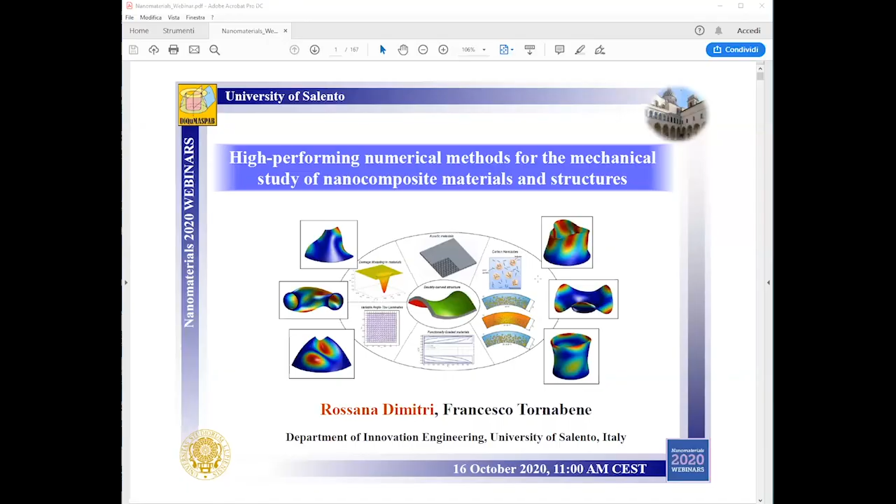So after a brief introduction, I will show you the main basics for anisotropic laminated and lattice shells. Then I propose the so-called generalized differential quadrature and generalized integral quadrature methods as efficient numerical tools to solve different structural problems, applying different materials and constitutive relations within a large numerical investigation.

So here I briefly describe the three basic aspects of the problem. The first two are theoretical, based on a unified formulation and differential geometry for a general description of higher order physical shell theories. The last one has a computational nature and relies on two numerical techniques applied to approximate the derivatives and integrals of equations involved in each selected problem to check for accurate solutions. These are the GDQ and the GIQ, respectively.

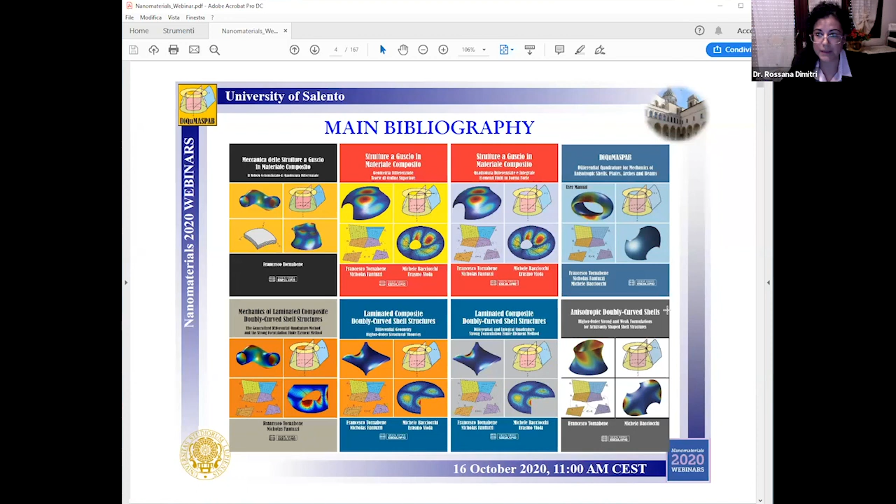More theoretical and computational details about the materials and structures presented here can be found in these books, where you could recompute all the results with free software. Here you can see the name of the software that we have written over the years.

So let's start with the theory of anisotropic laminated shells, whose general shape is defined by means of a reference surface, curvilinear coordinates, and the position vector for an arbitrary point of the solid throughout the thickness, which is in turn defined by means of the position vector of the corresponding point on the reference surface.

In a differential geometry context, this corresponds to introducing the metric of the parametric curves and surfaces by means of the first fundamental form and the Lamé parameters. Then we define the curvatures with the second fundamental form and the normal vector definition at each arbitrary point of the shell element.

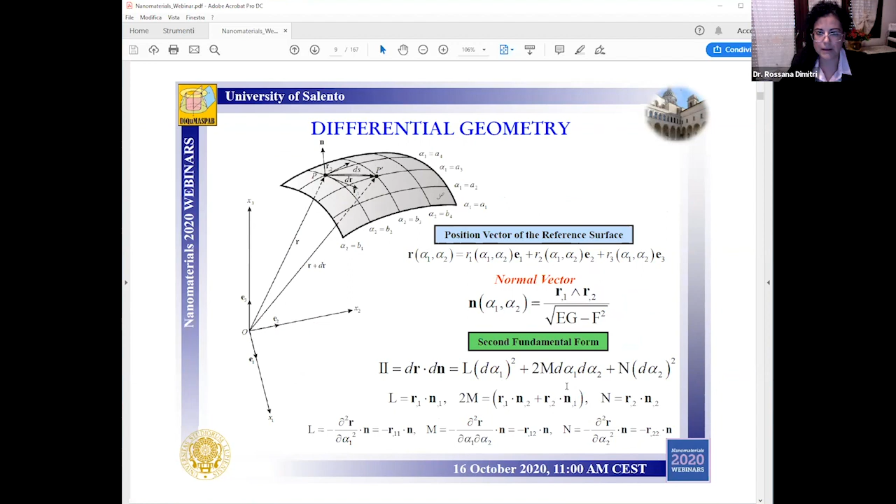So in a principal system of coordinates, this means that the quantities f and m will be equal to 0, where the principal radii of curvature are defined through these ratios you can see here below, R1 and R2.

So briefly, I introduced the kinematic model within a unified formulation that allows us to study and compare several higher order displacement fields in a unified manner, such that the mechanical behavior of doubly curved structures is defined by proper selection and choice of several thickness functions that characterize the kinematic expansion along the three principal coordinates.

In this context, we define a moderately thick shell according to an equivalent single layer approach, including the zigzag effect or Murakami function, as you can see here in the extended form.

Here you see an example of higher order shear deformation theory depending on 18 degrees of freedom, where the well-known Reissner-Mindlin theory, the first order shear deformation theory, represents just a subcase defined by means of two thickness functions and 5 degrees of freedom. So look at the reduced kinematic relation here below.

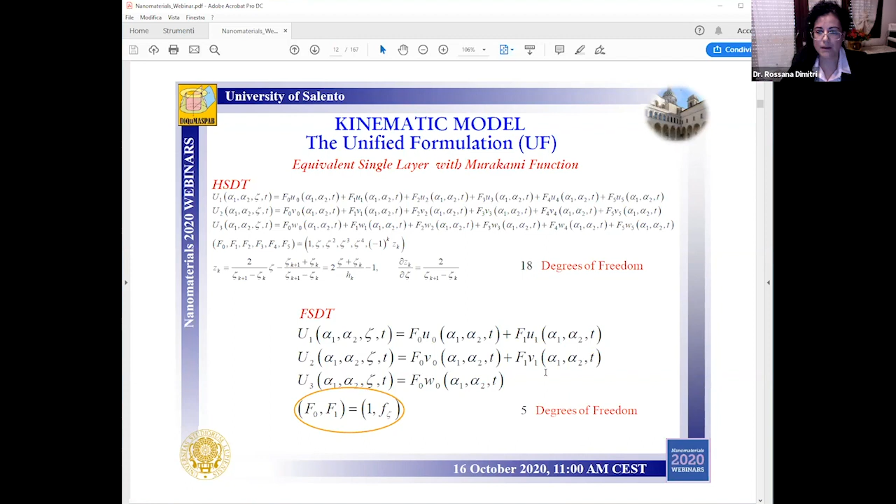And due to the general assumptions of this approach, each thickness function can take a different expression, as you see here. According to this choice, several kinematic models can be obtained and studied.

Now, for simplification purposes, we can generally define the kinematic model for an equivalent single layer approach in this kind of compact form, where we account for the zigzag function and Murakami function. And let's look at the following different unified formulation examples.

As a first example, if a fourth order kinematic expansion is considered, we obtain this following higher order kinematic model where we use power series as thickness functions, or assuming different thickness functions such as hyperbolic sine and cosine, which yields the following kinematic models here below.

Based on the compact notation, several structural theories characterized by a different order of kinematic expansion tau can be obtained for thickness functions independent of the principal direction for each generalized displacement component. Here you can see this kind of list.

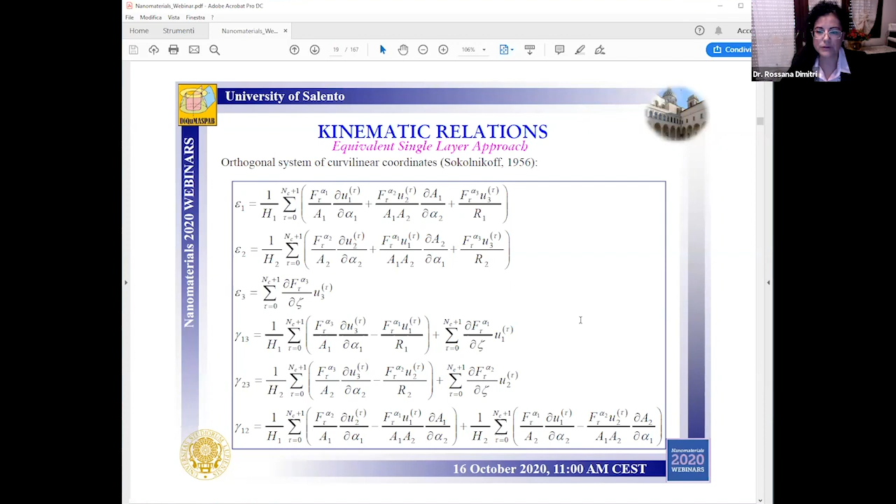Starting with the kinematic assumptions, we can define the kinematic equations for doubly curved shell structures, which relate the strain components and the kinematic field by means of a kinematic differential operator that can be redefined, as you can see here, within an equivalent single layer approach, where the following definitions are set for the in-plane strain components, the transverse shear strain, and the normal strain components.

An important aspect now is related to the design material, its mechanical properties, the constitutive law, and under a linear elastic material assumption, for example, see the constitutive law introduced for an anisotropic material with the well-known 21 elastic constants, or the orthotropic material with the 9 constants, or once again, the laminated composites with a fixed number of laminae within the laminate.

And among the class of particulate composites, we can also model the so-called functionally graded materials to account for the continuous gradual variation of the mechanical properties of materials from the bottom to the top side of each lamina, in order to reduce possible stress concentrations and residual stresses or thermal stresses within the laminates.

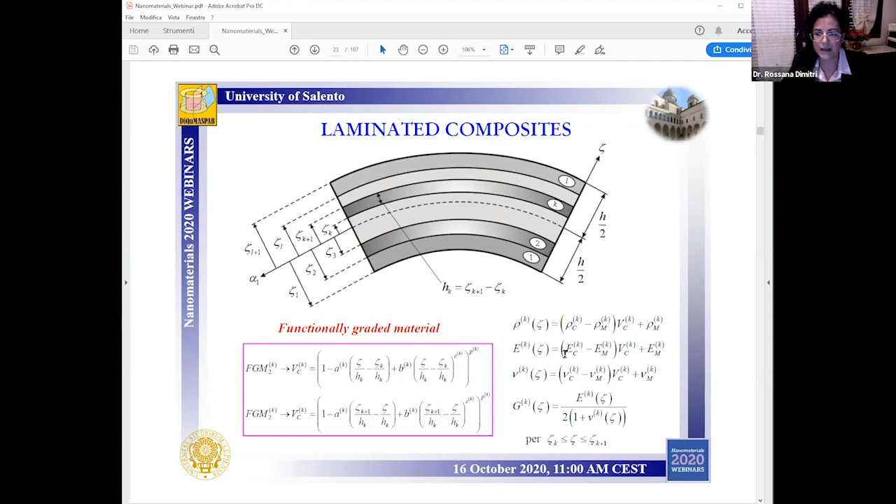This means that the mechanical properties of a functionally graded material refer to those of each constituent, for example ceramic and metal, together with a volume fraction defined according to some fixed continuous laws, as you can see here. And for each lamina made of anisotropic material, the constitutive law in the geometric reference system can be defined.

As you can see in this slide, we determine the transformed elastic coefficients first, and then we can define the generalized internal actions reported on the shell reference surface in terms of the generalized strains by means of the constitutive operator. You can see here this block matrix, whose elastic coefficients are evaluated numerically for each point of the reference surface of the shell.

I want now to highlight an important aspect of this approach: the mechanical properties of each lamina can vary along the three principal directions. So we have this kind of coefficients, and we can consider that the thickness of each lamina can vary along the two principal directions - the fact that the thickness of the shell can be variable.

But to consider this kind of variation in the model, we have to evaluate the derivatives of the engineering elastic constants in a numerical sense. So I need a numerical technique to do this kind of mathematical operation.

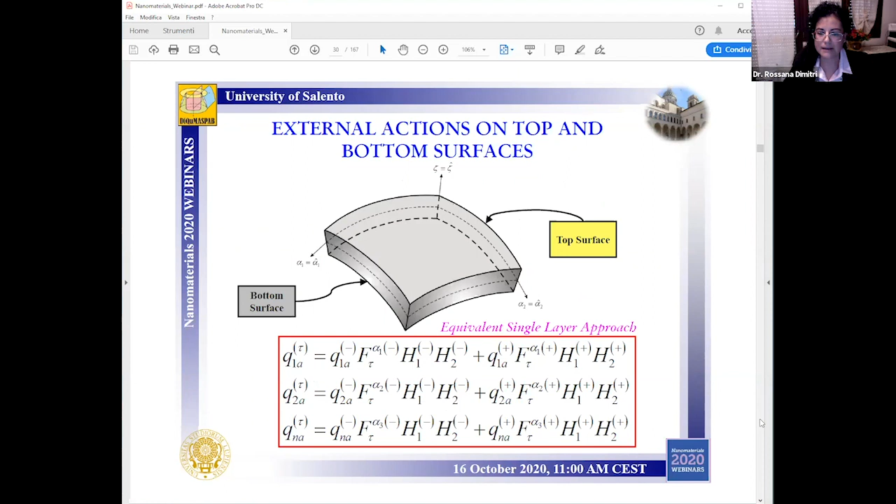So then we apply the Hamilton principle to obtain the equations of motion together with the boundary conditions. We have defined external actions that act on the top and the bottom side of the structure. After a mathematical manipulation, we get this set of governing equations depending on the inertial quantities together with the boundary conditions of the shell edges, with a constant alpha 1 and alpha 2 respectively.

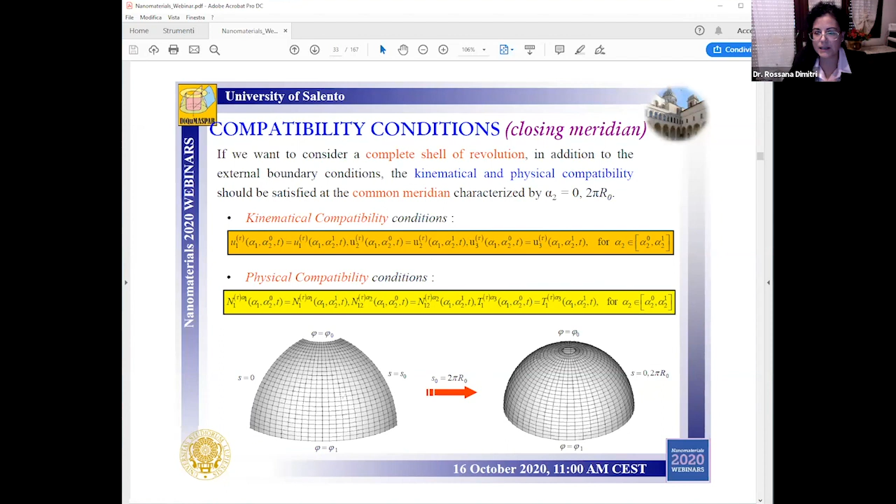At the same time, if we want to treat a complete shell of revolution as a structural member, we have to satisfy the kinematical and physical compatibility condition at the common meridian, characterized by fixed values of alpha 2, as you can see in this slide, since the shell of revolution represents a special case of a panel of revolution, maintaining the problem completely bidimensional, two-dimensional.

Look at these two further examples of shells of revolution, just to show you that similar compatibility conditions can be enforced along the so-called closing parallel or closing meridian. Then we can write the fundamental nucleus in terms of the displacement field defined along the reference surface, and then we can assemble the complete system of equations, as you can see here.

Now let's introduce the numerical technique applied here to solve this kind of differential system of equations, the so-called generalized differential quadrature method, that allows us to approximate the n-th derivative of a function as a weighted linear sum of the functional values at some fixed collocation points by means of these weighting coefficients.

In this context, if we select as basis functions the Lagrange polynomials, the Lagrange trigonometric polynomials, or the sinc functions, we have an important mathematical property: the coefficient matrix A becomes an identity matrix, and the arbitrary derivative will depend on weighting coefficients Dij exactly equal to Aij. After that, if we want to shift from the definition interval to the physical domain, we have to apply a linear transformation of the weighting coefficients between the two different intervals, as you can see here.

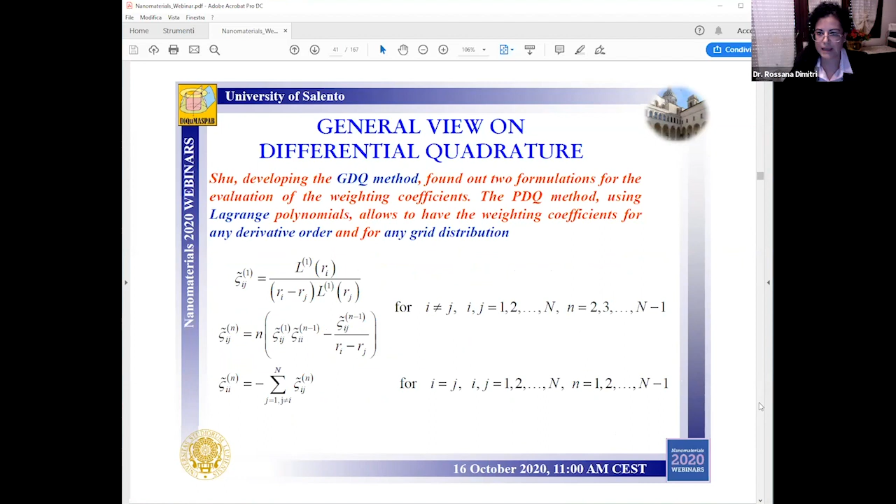At the same time, if we want to evaluate integrals of a function, there is another useful numerical tool that can be applied: the generalized integral quadrature method, as we will apply in the following.

In line with the previous method, the integral of a function in a closed domain can be approximated by a linear combination of the functional values by means of the GIQ weighting coefficients. These coefficients are evaluated by an inversion of the matrix W, which depends on the matrix of the weighted coefficients of the first order derivative computed here.

Using this simple relation, we can evaluate the integral of a function in any kind of closed interval. Now, to study a complicated shell geometry, we can start from an unmapped geometry.

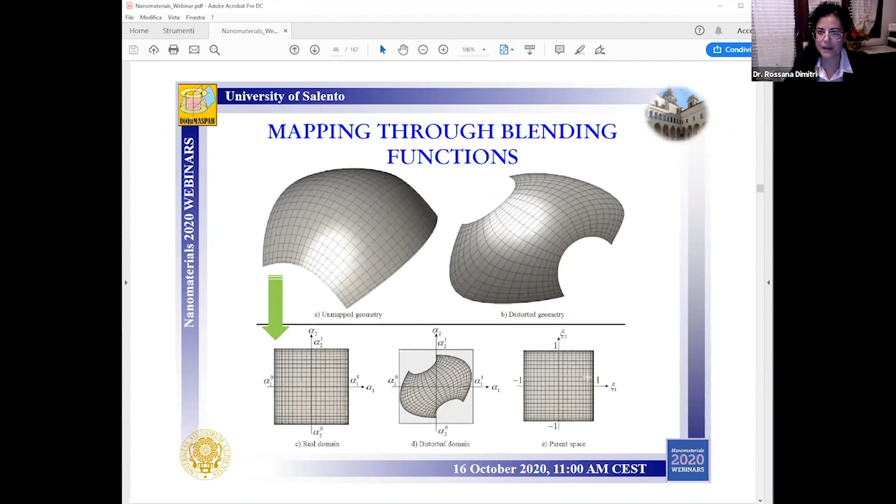We introduce a mapping technique to pass through the parent space in order to obtain the distorted geometry. Here is the coordinate transformation, where alpha1, alpha2 refer to the physical orthogonal coordinates, and xi, eta are the point coordinates in the computational domain.

This requires the use of some blending functions, where we use the computer-aided design basis function as defined below, by means of the parametric lines of the curvilinear boundaries and the computed corner points of coordinates.

We have to define the Jacobian of the transformation so we can compute the first order derivatives, and applying the first order derivative definitions twice, it's possible to obtain the second order derivatives.

To describe the curvilinear edges of the patch, we use a design tool: the non-uniform rational B-splines as mapping functions, where a rational curve can be obtained by a projective transformation of the B-spline curves in the projective space.

These functions have some important mathematical properties, as you can see in this list, that provide a robust description of the problem, so we can study any kind of complicated geometry, as you can see here. But I must introduce another important aspect.

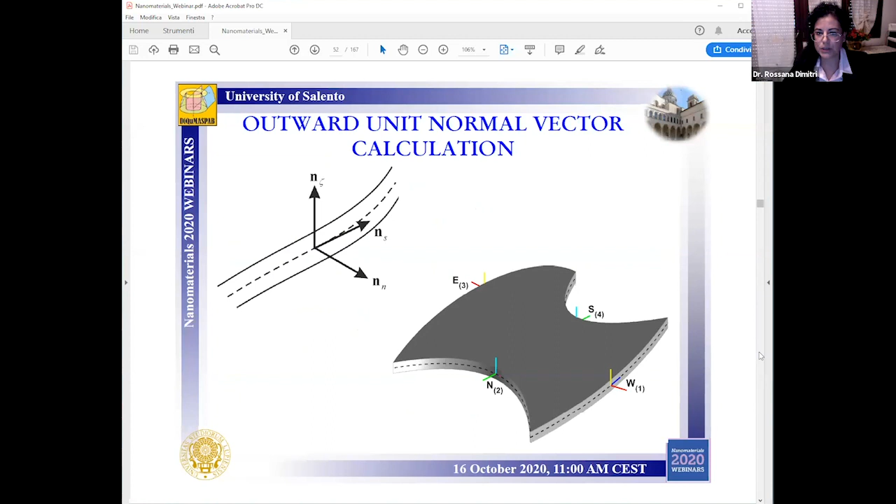I mean the boundary conditions of the curvilinear edges that you can see here in the slide, both in a kinematic and in a static sense.

So far we have discussed a strong-based formulation of the problem, but another numerical possibility can be represented by the classical finite element formulation.

For an nth order finite element based on the Lagrangian polynomials, the displacement field can be approximated as you can see here, or in the following compact matrix form.

Thus the problem can be written in its variational form. Once again, by applying the Hamilton principle, the stiffness matrix takes this form.

This can be rewritten in a discretized form using the numerical integration discussed before. The differential operators defined by means of the Lamé parameters and their derivatives are numerically discretized using the GDQ method.

And also for the mass matrix and the external force vector, we can rewrite them in a discretized form, as you can see here.

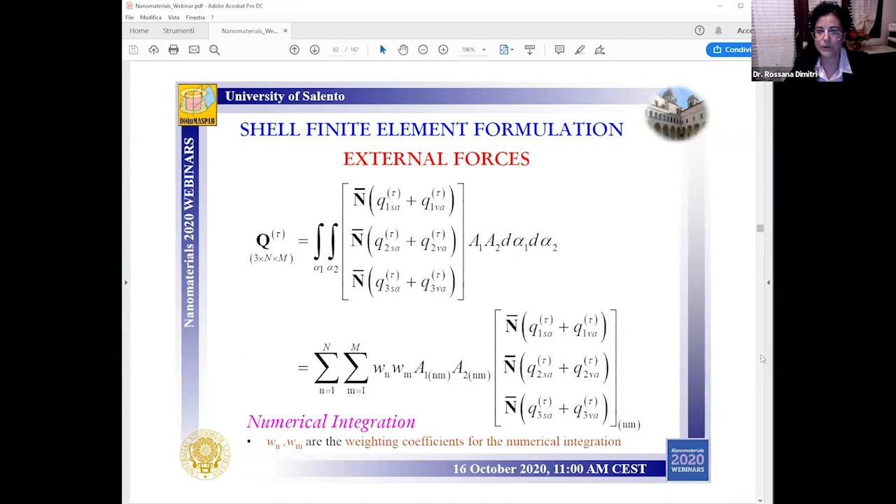Now, if we want to treat the dynamic problem of these structural components, we have to solve a classical eigenvalue problem in discrete form, whereas for a static analysis, we have to solve a classical linear problem.

So now let's discuss applications and results, where we first apply the finite element method based on a strong formulation isogeometric analysis to treat shell structure components with different shapes.

As a first example, we analyze the free vibration of an isotropic panel for different boundary conditions, lamination schemes, higher order formulations and theories, where we can cut the undistorted domain using a rhomboidal shape.

We show first the accuracy of the numerical method and proposed formulation by comparing the first 10 frequencies for a lamination scheme of 30-45 degrees, as provided by the first order shear deformation theory and higher order theories, against the 3D FEM based approach from commercial codes.

So we have used Abaqus in this case, with very good agreement between results, and here are the related mode shapes for the selected boundary condition.

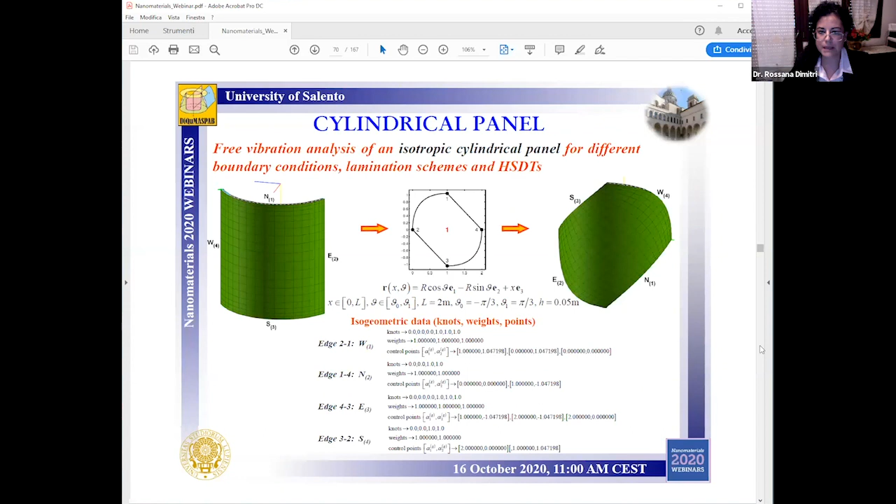As a further application, let's consider a cylindrical panel cut by this general shape, defined by two curvilinear edges and two linear ones, to yield the complicated geometry you can see on the right side of the slide, made of one isotropic layer, an aluminum, for two different boundary conditions, where we compare the 3D FEM-based solutions with the 2D ones as provided by 2D higher order formulations.

So the very good matching between results confirms the high accuracy of the proposed numerical approach, despite the reduced computational cost against the classical 3D FEM-based formulation.

As expected, a completely clamped geometry features higher frequency because of the different structure stiffness with respect to other boundary conditions. A free clamped boundary condition, where the lowest frequencies are obtained in any case for the same structure with free edges, as you can see here at the bottom side of the slide, because of the increased structure flexibility.

Here are the first 6 mode shapes reflecting the selected boundary condition.

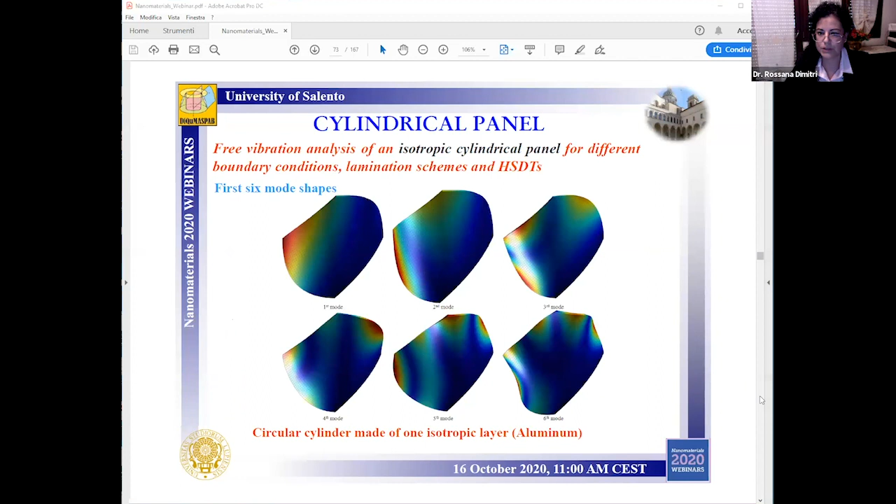For a comparative evaluation between the strong and the weak formulation isogeometric analysis, let's consider a laminated doubly curved shell for different boundary conditions, stacking sequences, and higher order formulations, where I cut this undistorted domain using this complicated curvilinear geometry to give the final distorted structures you can see here on the right side of the slide.

Here are the results for a completely clamped doubly curved shell structure, where each layer is made of a graphite epoxy material with a stacking sequence of 0, plus/minus 45. Both the strong and the weak formulation get very accurate results compared to the classical 3D FEM elasticity solution.

This proves once again the accuracy of our predictions, which are also plotted in terms of mode shape in line with the selected boundary condition.

Now another application involves doubly curved laminated lattice shell structures, as largely used in design and manufacturing, especially in aerospace structures, with different shapes and geometries depending on their operational requirements.

The mechanical properties of lattice structures are related to their fabrication technologies. In discrete models, the ribs of the lattice shells are modeled through beam finite elements. Instead, here we apply a GDQ-based continuous model based on a homogenization technique to define the equivalent mechanical parameters.

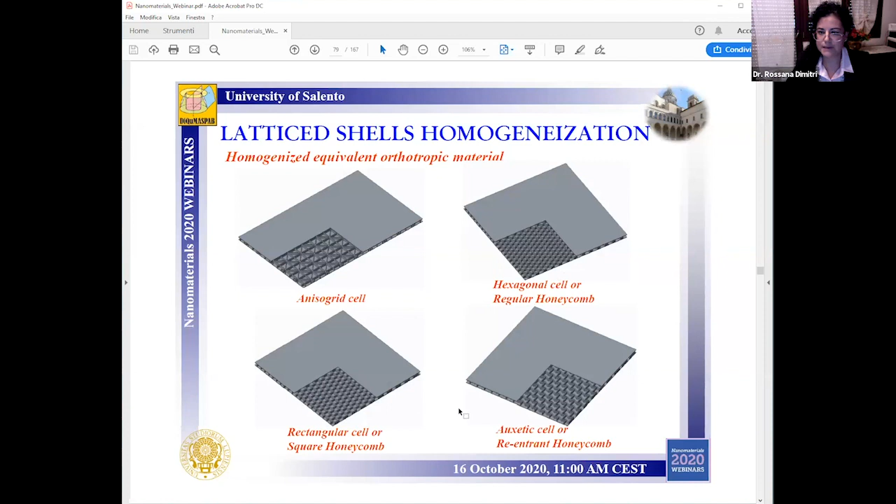See here some examples of lattice structures with an anisogrid cell, a hexagonal cell, a rectangular cell, or an auxetic cell. So for a lattice layer, a first approximation could consider

the equivalent orthotropic material, whose equivalent constants for a unit cell could be computed as a function of the main geometrical and mechanical properties of the ribs.

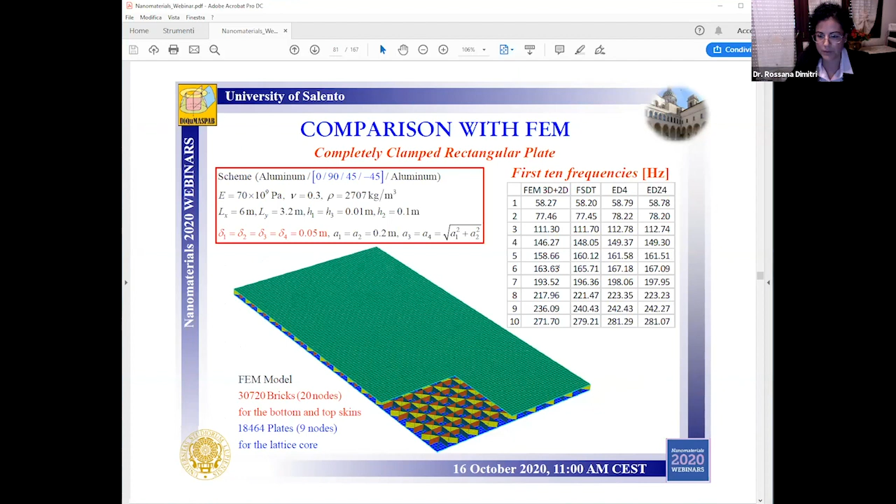The accuracy of a GDQ-based continuous model is first checked for a completely clamped rectangular plate with a lattice core, by comparing our results in terms of vibration frequencies with respect to a classical FEM approach. The very good agreement between our results and those based on the FEM approach confirms the good performance and accuracy of the proposed numerical method, also for this kind of application.

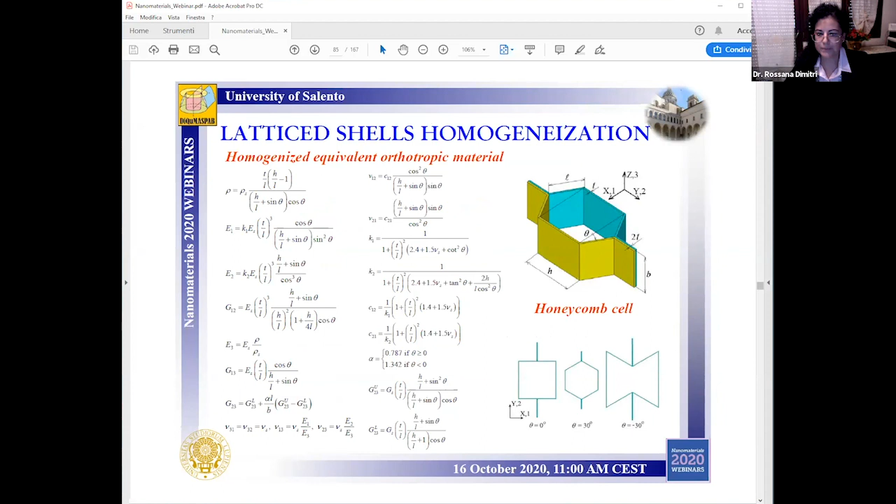In what follows, I show you some structural applications of a novel class of bio-inspired smart composite materials, in which the fiber orientation can vary with continuity within the domain.

In this context we will describe this kind of material, the variable angle tow reinforcement, that can be obtained by placing the reinforcing fibers along some curvilinear paths.

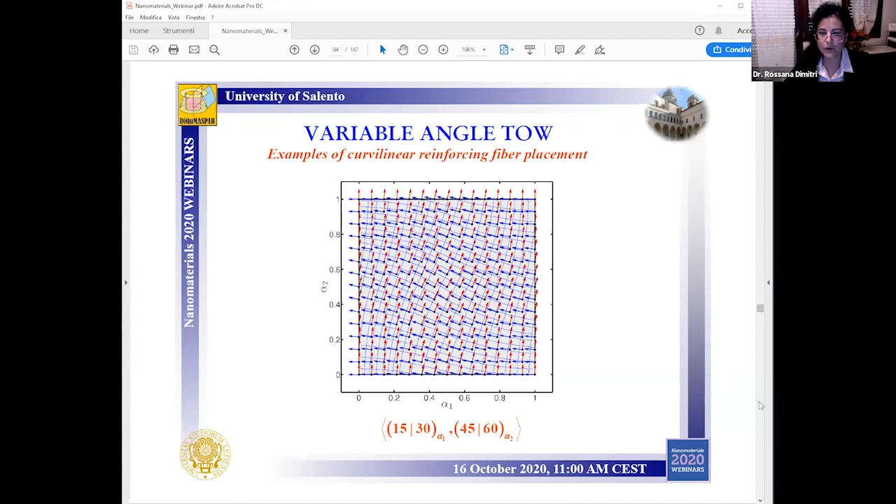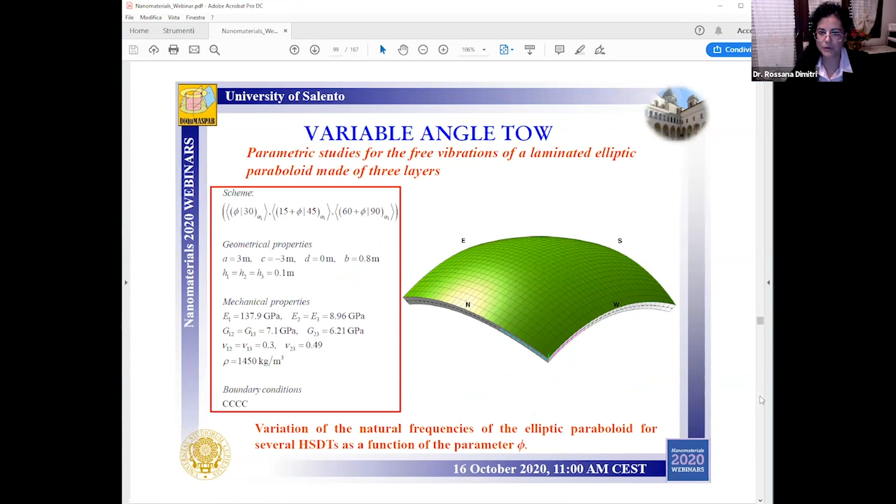Let's consider a laminated elliptic paraboloid made of 3 layers, where we check the sensitivity of the vibration response, changing the parameter phi, which defines the varying alignment of the fibers, and look at the variation for the first 10 natural frequencies under the selected theory as we vary phi.

This reveals the great dependence of the mechanical performance and structural stiffness just by varying and tuning properly the reinforcing phase and its alignment within the material. Look also at the kinematic response, which is perfectly coherent with the selected boundary condition, a completely clamped structure.

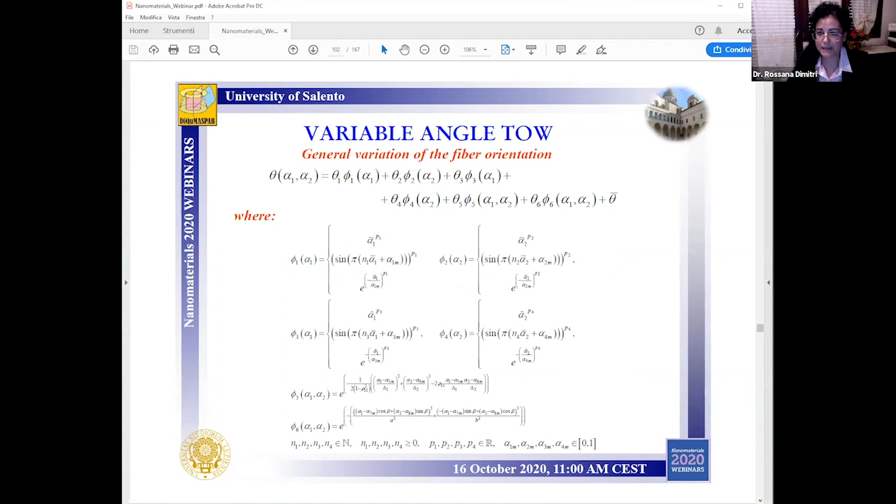An alternative and more general expression can also be introduced to represent the variation of the fiber orientation. Mathematically, this relation can be written by means of 6 different functions, as reported here below: the power function, sinusoidal function, exponential function, Gaussian function, elliptic function, and so on.

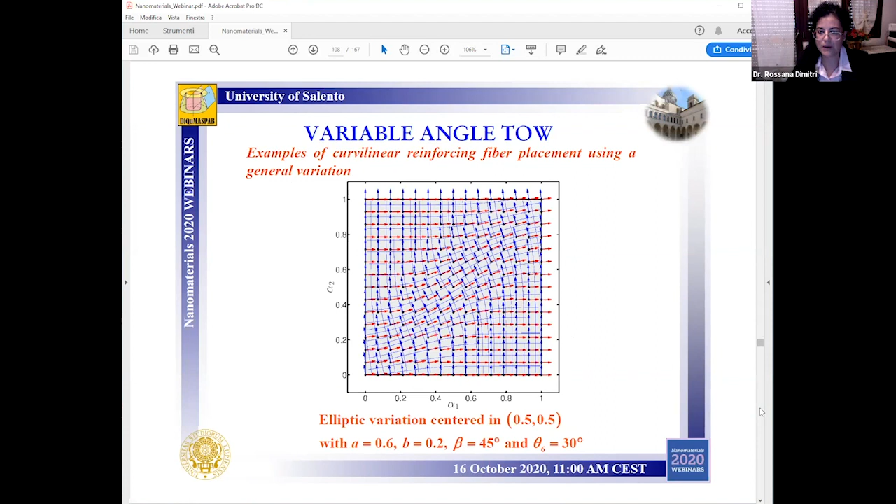Here we represent some examples related to the application of this mathematical relation on a square domain. Here are other examples, and have a look here now at some further examples of this application.

And as a further application, let's consider a clamped-free doubly curved sandwich panel of revolution with a foam core and two face sheets with different angle tow paths.

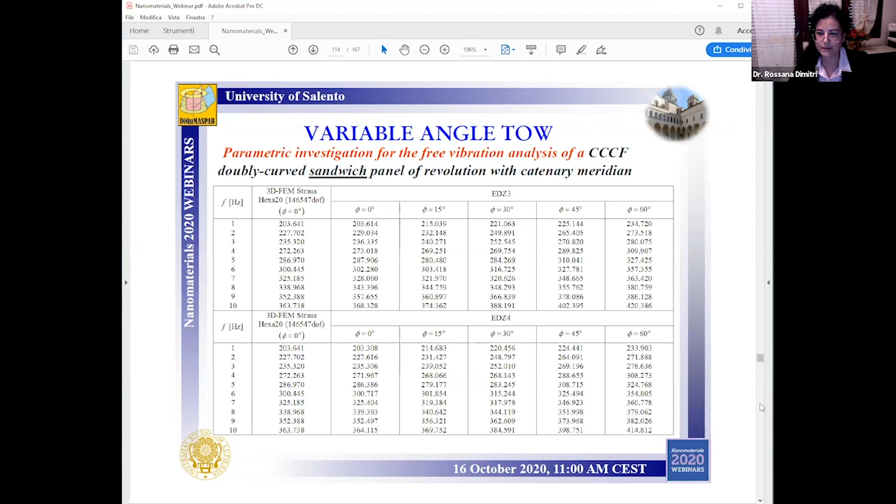Here we compare results from a 3D FEM and different 2D higher order theories for different values of phi. Under the assumption phi equal to 0, the first column here, we revert to classical laminated composite structures, where you can notice the very good agreement between results, and also that predictions from different higher order theories are quite close to each other for each fixed value of phi.

And let's move to another kind of reinforcing material, I mean functionally graded materials and carbon nanotubes, in a context where nanostructures are attracting the interest of many scientists.

The proposed formulation allows us to consider the agglomeration of nanostructure embedded in a polymeric matrix, and different distributions along the shell thickness, where the volume fraction of the reinforcing carbon nanotube phase is defined by this quantity VR, the carbon nanotube volume fraction value that depends on the carbon nanotube mass fraction and the density of both the matrix and the reinforcing phase.

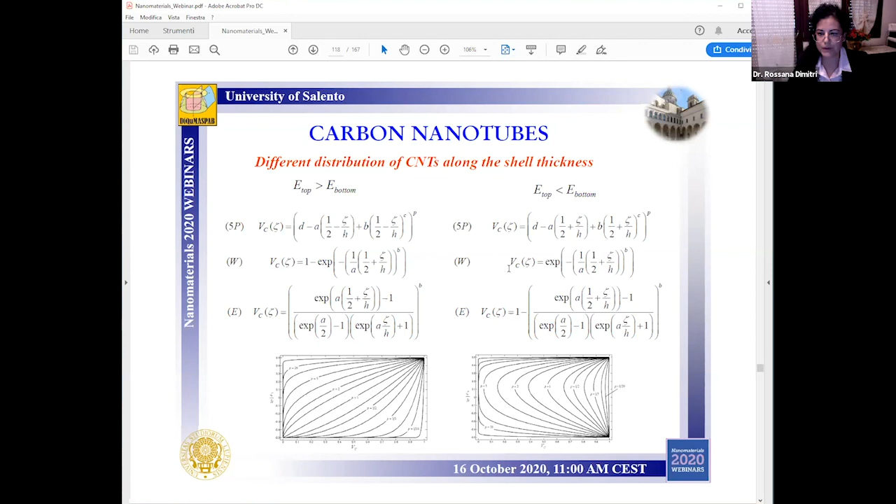VC instead is defined by different distribution laws throughout the thickness, as reported here in this slide. So the overall mechanical properties of the layer reinforced by carbon nanotubes are evaluated using the Mori-Tanaka scheme.

A two-parameter agglomeration model is defined by means of these two quantities, eta and mu, where the first parameter is the volume fraction of the inclusion, the ratio between the volume of the spherical inclusion and the total volume of the lamina.

And the second one, eta, is the ratio between carbon nanotubes in the inclusion and the overall carbon nanotubes. Depending on the different relation between these two parameters, we can obtain different agglomerations of carbon nanotubes within the material. The overall mechanical properties of the composite can be determined in a homogenized form according to the Mori-Tanaka scheme.

See, for example, the effective bulk modulus and shear modulus for the composite layer, defined by means of the properties of the inclusions and hybrid matrix.

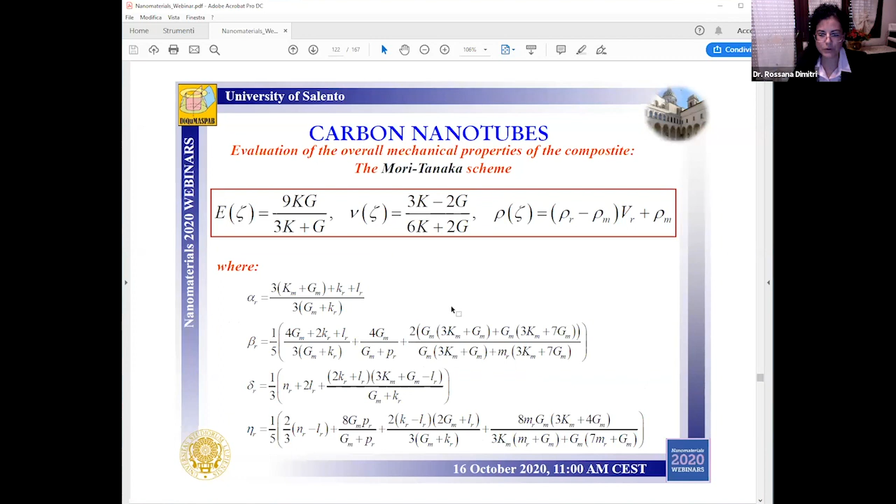And since the composite ply is isotropic, the Young's modulus, the Poisson ratio, and the density are evaluated as you can see here, where we introduce also these further quantities.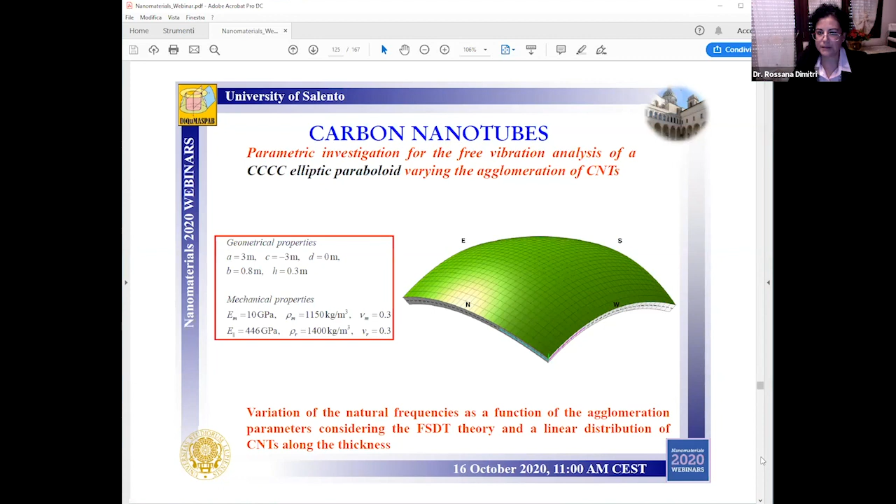Now, as a numerical application, let's discuss the free vibration response of a completely clamped shell for different agglomeration parameters of carbon nanotubes. In this example, we assume a linear distribution of carbon nanotubes along the thickness, applying a first order shear deformation theory under a fixed geometry and fixed mechanical properties of the matrix and of the reinforcing phase.

Now, as a further parametric analysis, we account for the case of no agglomeration of carbon nanotubes within the matrix. This corresponds to the case where we assume eta equal to 1, and also mu equal to 1, as you can see here, for different values of P.

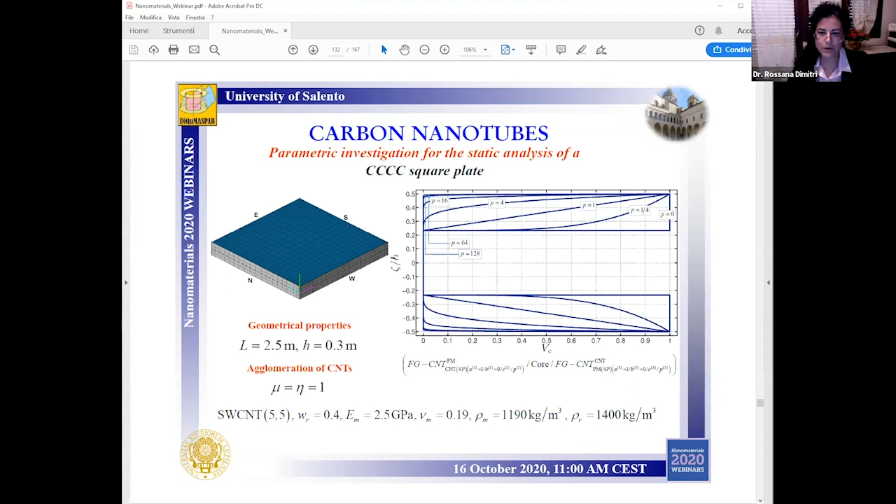The two limit cases are also obtained using the 3D FEM model in Straus7, while the intermediate values of P give a smooth variation in between.

As a last example, we analyze a clamped-free, clamped doubly curved panel of revolution with a tractrix meridian, made of 3 layers, subjected to a normal pressure on the bottom side and a shear load on the top side. Both the external laminae and the core are reinforced by carbon nanotubes under agglomeration with mu fixed equal to 0.5 and eta equal to 0.75, and a fixed mass fraction for the reinforcing phase equal to 0.4.

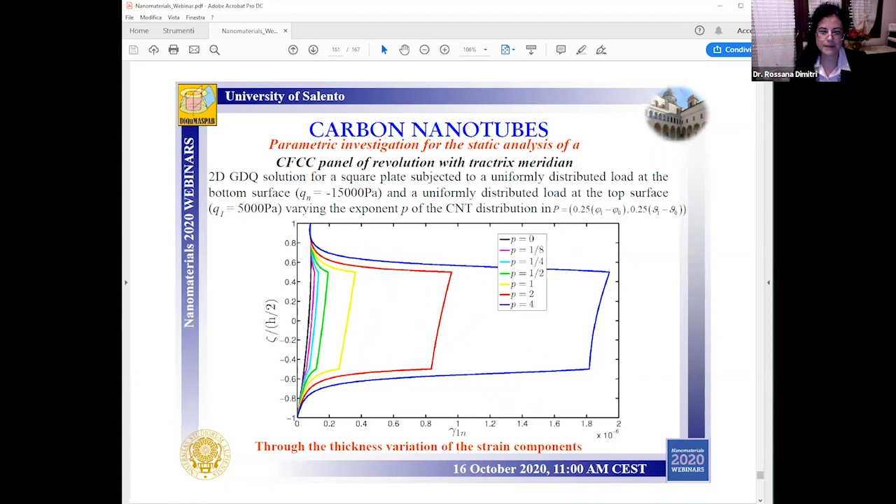So this kind of tailorable response could be of great interest for optimized design purposes of programmable materials, of course just depending on the selected application and the mechanical requirements.

Just concluding, the proposed approach for the analysis of two-dimensional structures by means of the GDQ and the generalized integral quadrature method has allowed us to analyze anisotropic composite and lattice shells and panels of different shapes, and has allowed us to study the behavior of generally laminated composite shells and panels characterized by different lamination schemes. It has shown the influence on the dynamic and static structural behaviors of the choice of a power law distribution for laminates made of functionally graded materials and carbon nanotube materials, and has provided results very close to a classical finite element method approach using different software and commercial programs. It has also produced accurate and reliable results independently of the selected boundary condition and grid distribution.

So at the end, I would like to thank you for your attention, and if you have any questions, I'm here to reply. Thank you very much.

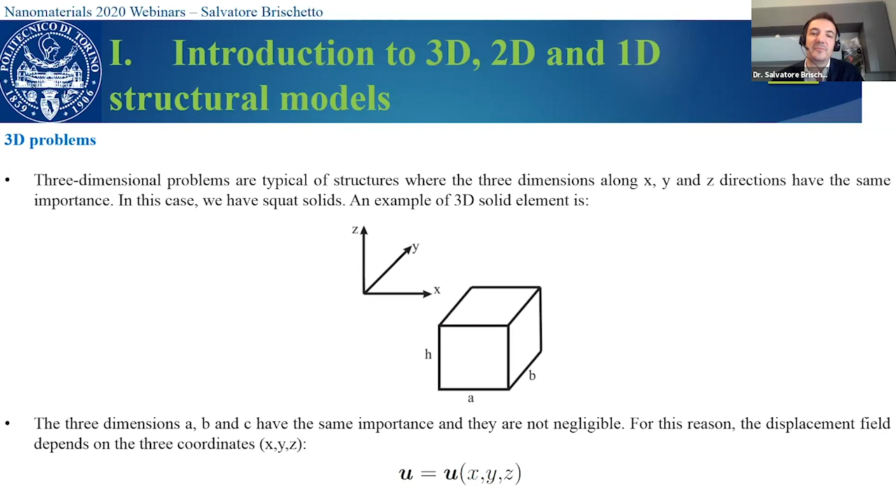In detail, in the case of three-dimensional problems, we have typical structures called squat solids, because in this case the three dimensions A, B, and C have the same importance, and no dimension is negligible. So I work with a displacement component, a variable which is a function of all three coordinates.

In the case of two-dimensional problems, we have typical bidimensional structures, for example plates and shells. In this case, one dimension, in particular through the z direction, which means the thickness dimension, is negligible with respect to the other two dimensions in the plane. This is a typical bidimensional structure: a plate, where we have no curvature in the in-plane directions, and in this case we can transfer the thickness coordinate into opportune thickness functions.

In the case of curvature, we have shell structures. Some examples are cylindrical panels or spherical panels, when we have only one curvature in the alpha direction, or two curvatures in the alpha and beta directions. So we can write this formulation in either rectilinear orthogonal coordinates or in orthogonal curvilinear mixed coordinates.

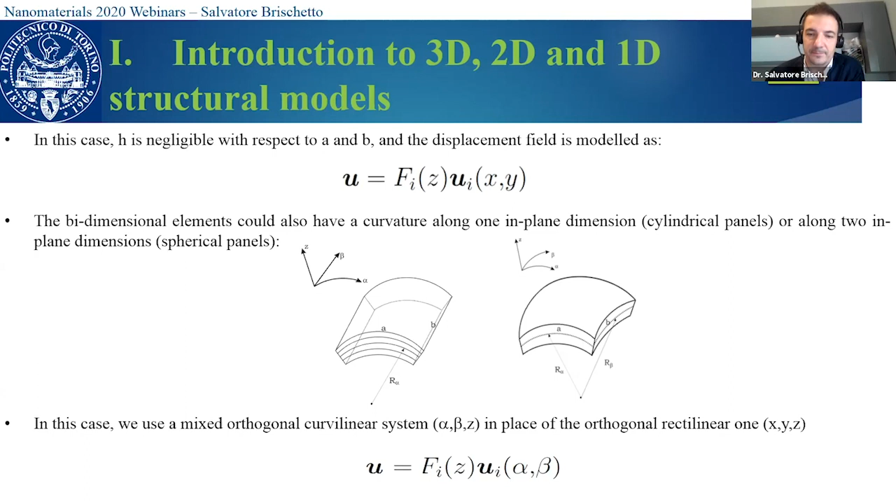Finally, in the case of one-dimensional problems, we have two dimensions that are typical of the cross-section of the structure. These two dimensions are negligible with respect to the main direction, that is L, the longitudinal direction, in the Z direction. So in this case, we can transfer the dependence on the two coordinates, where the dimensions are negligible, into opportune functions, and our variables become functions of only the Z coordinate.

In summary, when we have structural mechanic analysis, we can conduct this analysis by means of three-dimensional solids, two-dimensional plates and shells, and one-dimensional rods and beams elements. So we have functions that depend on x, y, and z, or only on x and y, or only on z. This means that the simplest element is the one-dimensional one, while the most complex is the three-dimensional one.

Then these equations must be solved. We can solve them by means of, for example, exact solutions, in order to obtain typical closed form solutions, or we can use numerical solutions. Some examples are the finite element method or the generalized differential quadrature method, as explained by Professor Dimitri.

The exact solutions are valid only for particular materials, particular lamination schemes, particular geometry, and particular load and boundary conditions. So these exact solutions are very important because they do not have numerical problems, but they are not general. They are valid only for particular cases, but they are very important because we can use them to validate the related numerical solutions.

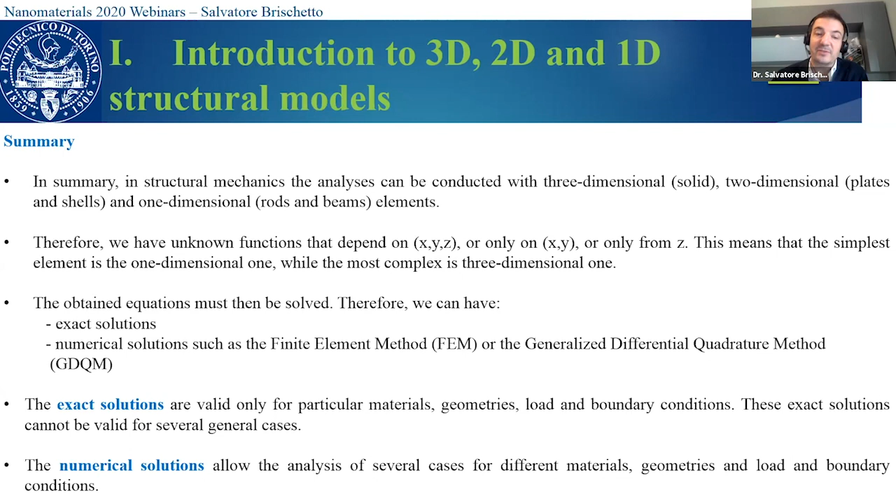Numerical solutions are possible for several cases. So we can consider several different materials, geometry, load, and boundary conditions. Obviously, in general, numerical solutions could be less accurate than the related exact solutions because, for example, we can have several numerical problems. And these numerical problems sometimes are hard to be solved and to be interpreted.

But in engineering applications, numerical solutions are the only ones that are used because they are general and have a wide range of applications. The exact solutions are only used for comparison reasons and in order to validate the related numerical models. So this is the main introduction about the idea of three-dimensional, two-dimensional, and one-dimensional modelization. Now we can see further details about these aspects.

First of all, we can see a general exact three-dimensional shell model. This general exact three-dimensional shell model is written in orthogonal curvilinear mixed coordinates. So two coordinates, alpha and beta, are curvilinear in the plane. The other one is always rectilinear, the z coordinate in the thickness.

And this model is general because we can write the equations for double curved shells. In particular, if we want to obtain an exact solution, these double curved shells are only the spherical shells, because we need to have the two radii of curvature equal between them in order to simplify some terms and in order to obtain closed form solutions.

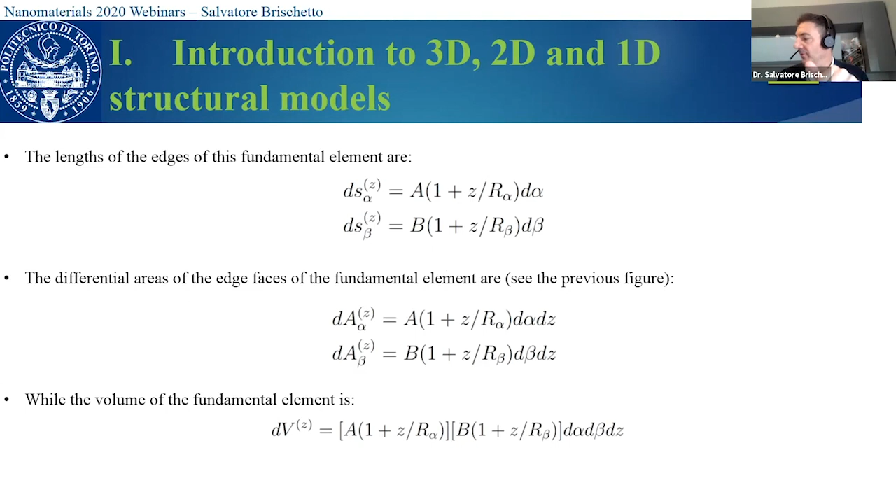If you note these last equations, obviously the z coordinate is rectilinear and the relative parametric coefficient is equal to 1. So we write the geometrical relations for spherical shells. Spherical shells in this case have these two radii of curvature which are equal between them. This is a great simplification, and it allows us to write very simple geometrical relations which link the strain components with the displacement components, and these are the geometrical relations for spherical shells.

Geometrical relations for cylindrical shells can be obtained by considering one of the two radii of curvature as infinite, so the related parametric coefficient is equal to 1. And in this way, these equations are simplified into these equations. These are the geometrical relations for cylindrical shells. In this case, we have considered an infinite R beta radius of curvature, and the related parametric coefficient H beta is equal to 1. So these equations are simpler than the previous ones.

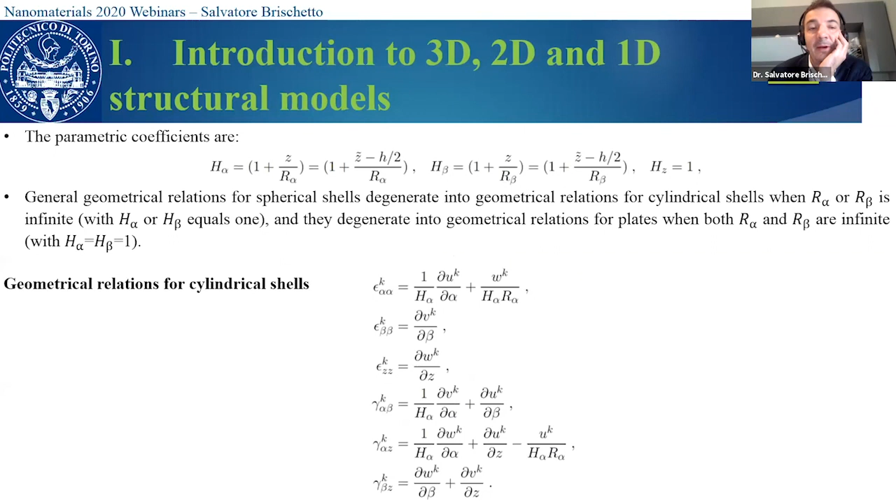If we also consider the other radius of curvature as infinite and the related parametric coefficients equal to 1, we have the typical geometrical relations for plates. These are well known. If we want, we can also call alpha and beta as x and y, rectilinear coordinates. So these are the geometrical relations for plates.

Similar considerations are also valid for three-dimensional equilibrium equations. These are the three-dimensional equilibrium equations written for spherical shells, with the simplified hypothesis that both radii of curvature are equal.

This is important because in our MATLAB in-house software code, we implement only these equations: the geometrical relations and the three-dimensional equilibrium equations for spherical shells. The other geometries, cylinders, cylindrical shell panels, and plates, are obtained as particular cases.

In this equation, we can see the typical partial derivatives of the three-dimensional stress components, typical of three-dimensional equilibrium equations. And we can also have the inertial terms, where we have the second temporal derivative of the displacement components.

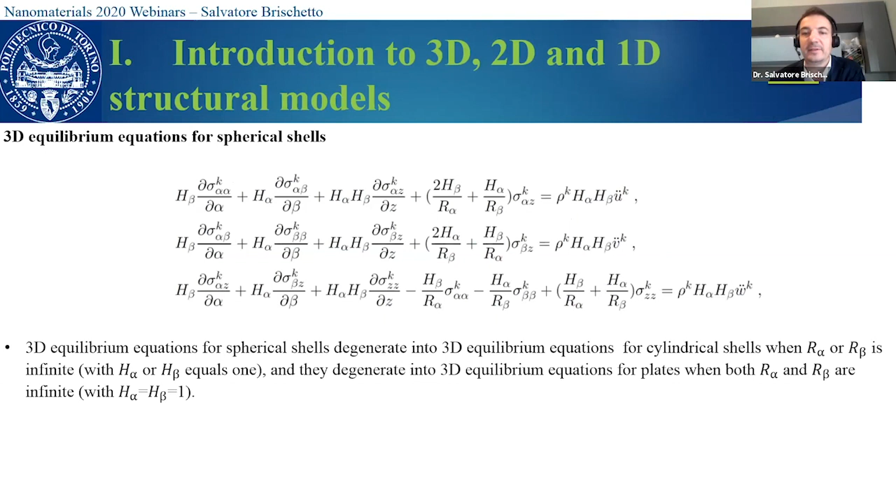These equations can be simplified for cylindrical shells by considering infinite R beta radius of curvature and the parametric coefficient H beta equal to 1. Then, considering also the other radius of curvature as infinite, we have the typical three-dimensional equilibrium equations for flat plates, as seen in studies, papers, and so on.

Now the second step is to consider the generalized Hooke law. So we have the Hooke law for the three-dimensional case, written for each K layer. And then, I recall that we want to obtain closed form solutions.

In order to obtain closed form solutions, we consider harmonic forms for the displacement components. This also means that all the edges of the structure are simply supported.

In this case, we have the index J in place of the index K only because we have divided each physical layer into several mathematical layers, in order to calculate the parametric coefficients H alpha and H beta, because these equations have not constant coefficients.

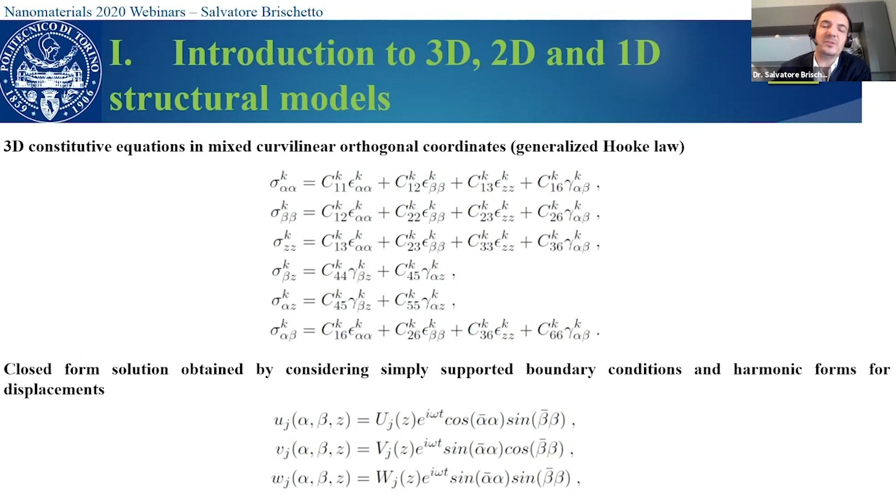They have not constant coefficients because there is a dependence on the Z coordinate. So we eliminate this dependence on Z coordinate by introducing several fixed mathematical layers.

So after all the substitution, we obtain this final system. This final system depends on J mathematical layers, because in general, for each K physical layer, these coefficients are not constant, since we have the dependence on thickness coordinates and curvature effects.

For example, if we also consider functionally graded materials, the elastic coefficients depend on Z. So in general, these coefficients are not constant.

But we need to have a system of partial differential equations in Z with constant coefficients if we want to solve it. So we divide each K physical layer into several mathematical layers, and we can have constant coefficient equations.

This system of partial differential equations in Z is a system of second-order differential equations. In fact, we can note that some displacement components have the second derivative performed with respect to the Z coordinate.

These 19 terms are very, very complicated because they contain several geometrical and material informations. Obviously, these partial differential equations are written for spherical shells, and they automatically degenerate into those for cylindrical shell panels and plates.

In order to solve this equation, first of all we reduce the order of the derivatives, so we obtain a system of first-order differential equations. This is obtained by doubling the number of variables.

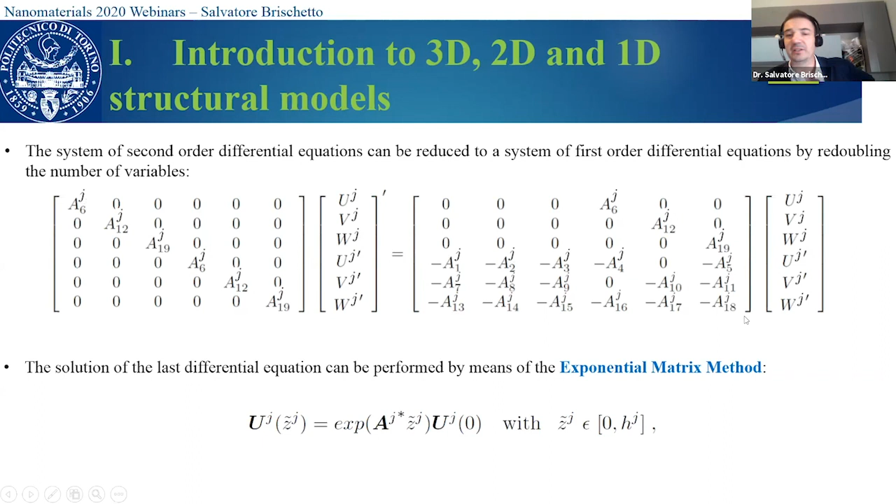In order to solve this system of partial differential equations in Z, we use the well-known exponential matrix method, with an opportune expansion in Z.

And finally, the last condition is, if you remember, the equations are written for each layer using a layer-wise approach, which means we write the equations separately for each layer. Then we need to connect each layer between them. We have the problem at each interface in order to impose continuity conditions, because we use a layer-wise approach. This is important because thanks to the layer-wise approach, we can obtain very refined results.

How do we impose these interlaminar conditions? We impose them in terms of displacement components. This means each displacement component is continuous at the interface. The bottom value for the J layer is equal to the top value for the J minus 1 layer, and so on. These are the typical congruency conditions.

Then we also impose equilibrium conditions for the transverse shear and transverse normal stresses. This is the same: the stress component at the bottom of the J layer is equal to the top value for the J-1 layer, the previous layer.

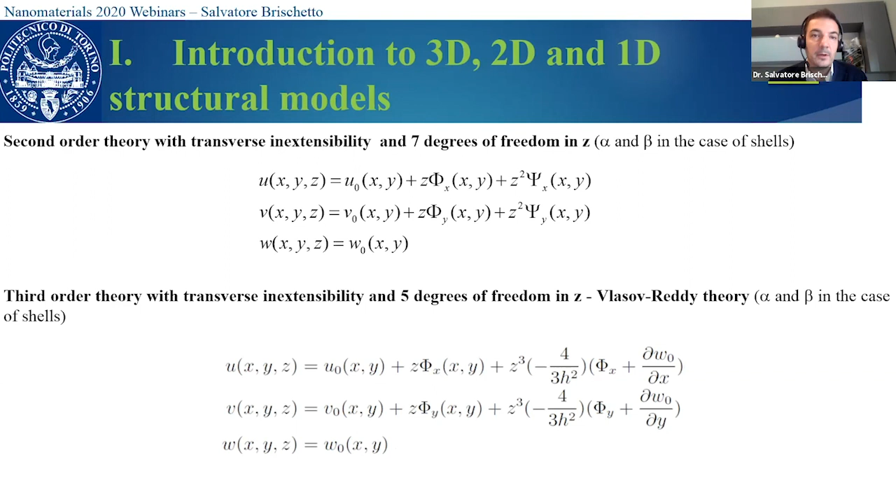Then there is another family of higher order theories, Professor Dimitri spoke about this. For example, in the equivalent single layer approach, we consider all the multi-layer structures as one equivalent structure, so the expansion for all displacement components is written for the whole multi-layer structure. In this notation you cannot see the dependence on the K layer, which means we write the expansion for the whole multilayer structure. In this case we improve the results, for example for very thick structures, because we introduce the thickness stretching effect. But we can have some problems, for example for structures with high transverse anisotropy, because in this way we cannot obtain the typical zigzag effect.

The zigzag effect can be introduced in an artificial way. For example, we have the typical kinematic-based zigzag theories, which are very simple because we add a simple function in order to recover this zigzag behavior. Or we have the so-called physically based zigzag theories, which are more complicated but more general, with a wide range of applications. The kinematic-based zigzag theories are simple but can have problems for particular lamination schemes, load conditions, or boundary conditions. Physically based zigzag theories are more complicated to implement but have a wide range of applications.

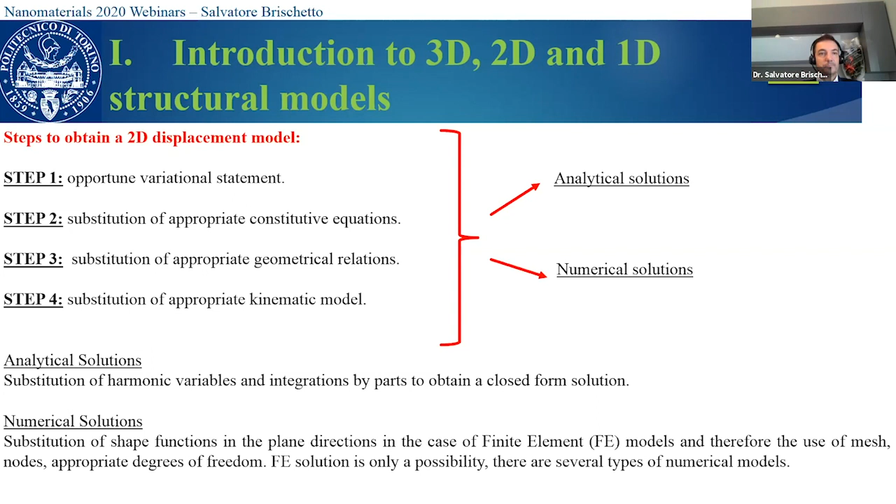Obviously there are also one-dimensional problems. An example is the Euler-Bernoulli beam theory. There is a strong analogy with the Kirchhoff plate model. It is obvious because we discard the typical shear effects, so the normals remain perpendicular to the middle surface.

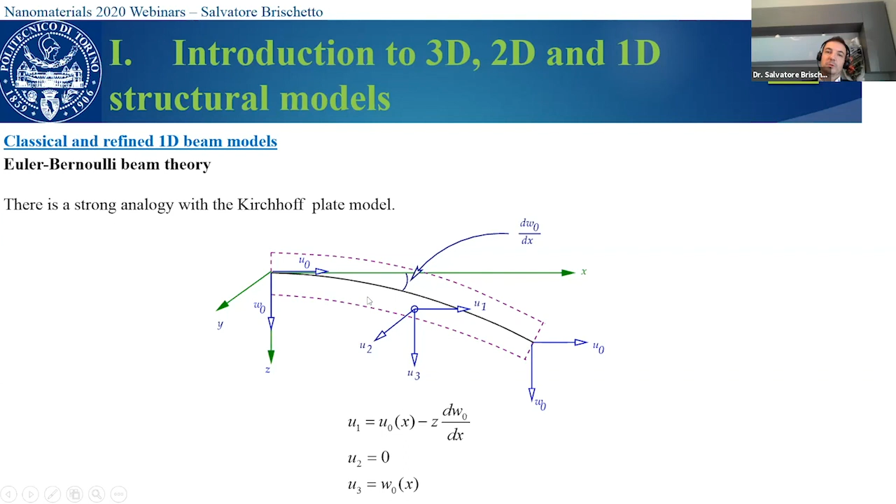Another possibility is the Timoshenko beam theory. There is a strong analogy with the Reissner-Mindlin plate model. So in this case, we introduce the shear effects. The rotation is not the derivative of the transverse displacement because we have the gamma xz strain.

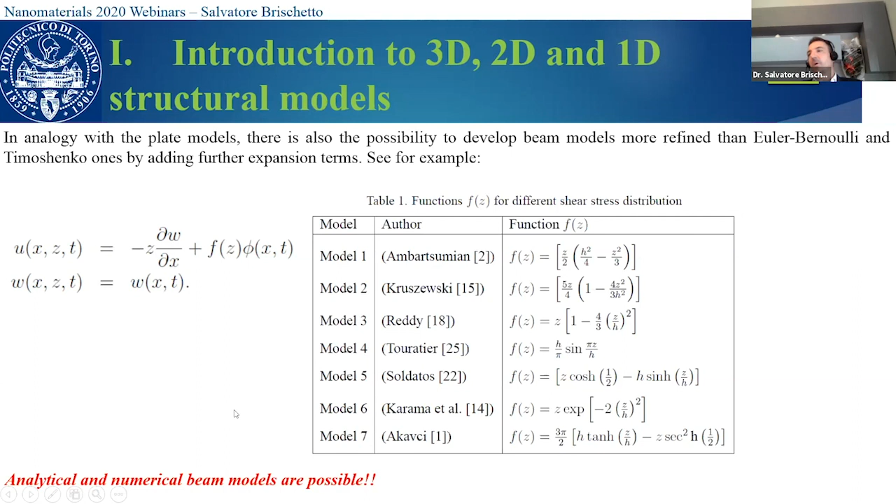And in analogy with the plate models, we can have some refinements of this theory. This is a typical example: the models by Ambartsumian, Reddy, Touratier, and so on. Obviously, beam models can be solved in both numerical and analytical ways.

Now we can see some details about nanostructures. Obviously, we have nanostructured materials when we are in a range from 1 to 100 nanometers. These materials have remarkable mechanical, electrical, optical, magnetic, and thermal properties. Carbon-based nanomaterials are very important because they have very important mechanical properties.

This is a typical example of a nanotube, discovered in Japan in 1991, and the length-to-diameter ratio can reach a very, very big value. We can see this carbon nanotube as a single sheet of graphite made up of carbon atoms, arranged in a honeycomb lattice and rolled on itself.

Depending on the axis of rolling, we have different nanotube types with different properties. So we define the chiral vector, CH, with these two unit vectors, and the numbers m and n are integers. Depending on the angle theta between the chiral vector and the unit vector A1, we have different nanotube types.

When m is different from 0 and n is equal to 0, we have the typical zigzag nanotubes, so theta equals 0. Then when we have the general case, when m is equal to n, we have the typical chiral nanotube — actually, that's the armchair nanotube. So the armchair case is when m is equal to n.

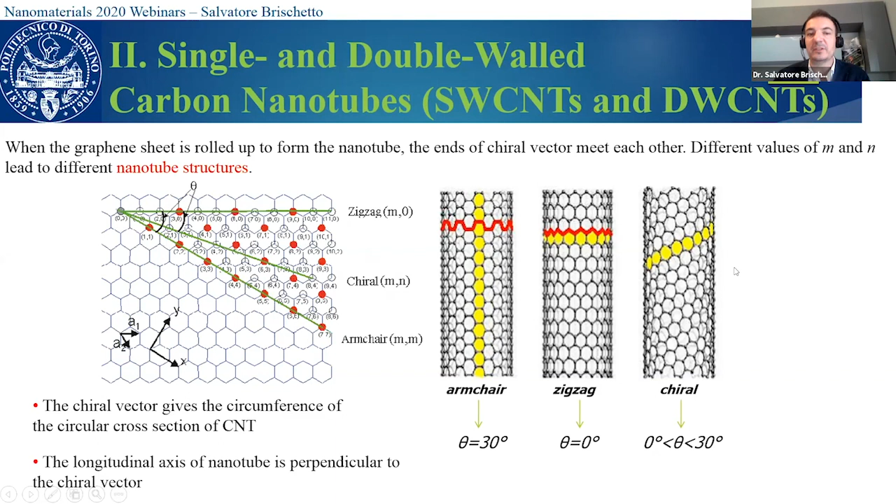This is a typical example for an armchair, where m is equal to n, or chiral, where m is different from n. We can see the difference in the longitudinal axis used to roll the sheet. Depending on these configurations — chiral, armchair, zigzag — we have, for example, conducting nanotubes, others with similar metallic behavior, and so on.

Another possibility is single-walled carbon nanotubes and multi-walled carbon nanotubes. In the case of multi-walled carbon nanotubes, each single nanotube is linked with the other by means of the van der Waals forces. This is a way to consider the van der Waals forces by means of the coefficient of interaction C and the deflection jump due to deformation. In our Layerwise models, we must think how to introduce this van der Waals force, because we cannot use the typical interlaminar continuity conditions.

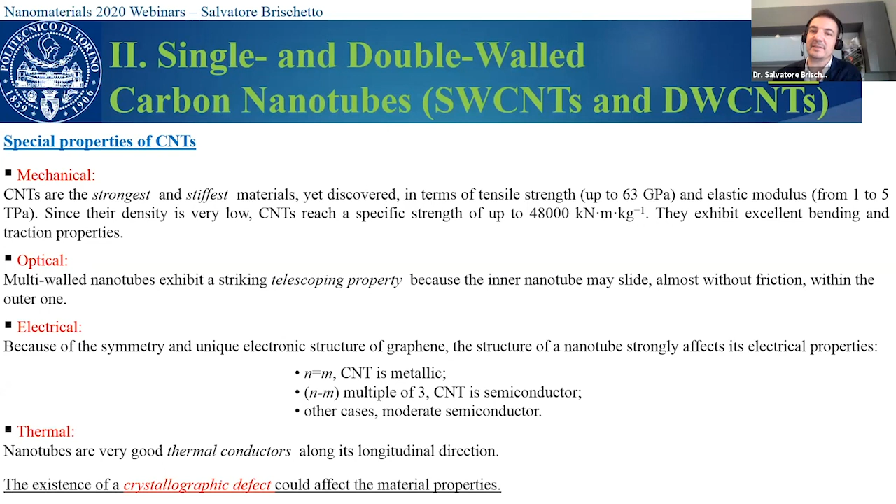This is a recall about the important properties in terms of mechanical, optical, electrical, and thermal properties for carbon nanotubes. They can have elastic modulus from 1 to 5 terapascal and a very low density. So the specific properties, that is the elastic property divided by the mass density, are very high values.

How to consider the mechanical modeling of carbon nanotubes? We can consider molecular dynamic models where we solve the Newton equations of motion for a system composed of a certain number of atoms, solving the equations of motion in very small time steps. This is the first approach.

The second approach is an atomistic-based model, a finite element model, where we have beam elements in order to describe the interatomic covalent forces, and concentrated masses which represent the carbon positions. We have some problems to solve in this method, because we must decide the rigidity of the beam elements in order to describe the interatomic covalent forces, and we have a high computational effort.

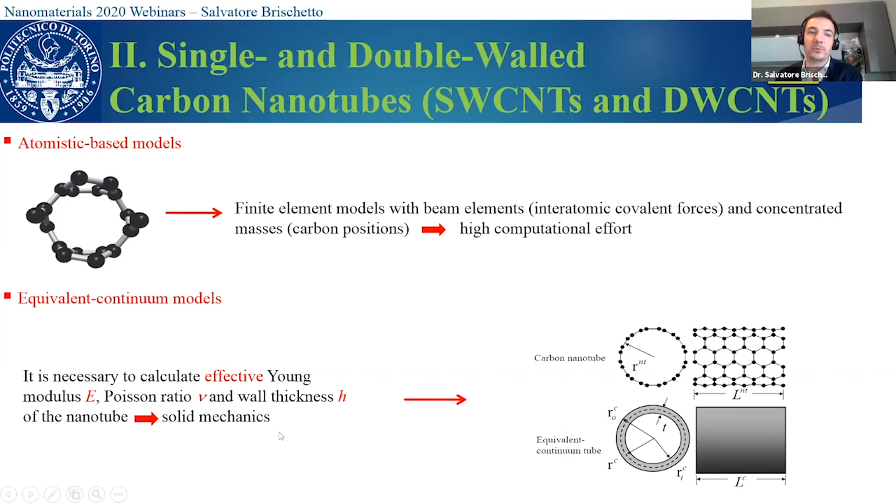A third possibility is an equivalent continuum model, because the carbon nanotube is a discrete model, and we consider an equivalent continuum tube where we suppose a hypothetical thickness. Obviously, the problem here is to define opportunely the Young modulus, the Poisson ratio, and the wall thickness H.

There are several possibilities in the literature in order to solve this problem, that is atomistic approach versus continuum approach. So in order to obtain a Young modulus which could be quite correct, we must define this hypothetical thickness, and it is not so easy.

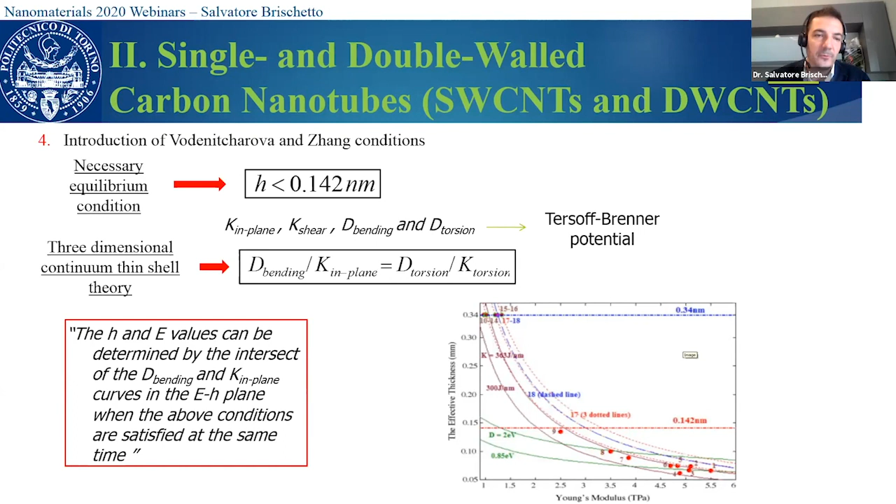One of the possibilities is to solve the Tersoff-Brenner potential, where we link the bending stiffness with the in-plane rigidity, and we consider also this limit: H less than 0.142 nanometers is for equilibrium conditions. Then from this system of equations we obtain opportune values for the Young modulus and the equivalent thickness.

In the case of double-walled carbon nanotubes, there is the same problem, so we must define a first thickness for the first concentric carbon nanotube and an opportune thickness for the other concentric nanotubes. After this, in the case of an equivalent single layer approach, we can consider a double-walled carbon nanotube as only one carbon nanotube with the total thickness 0.7.

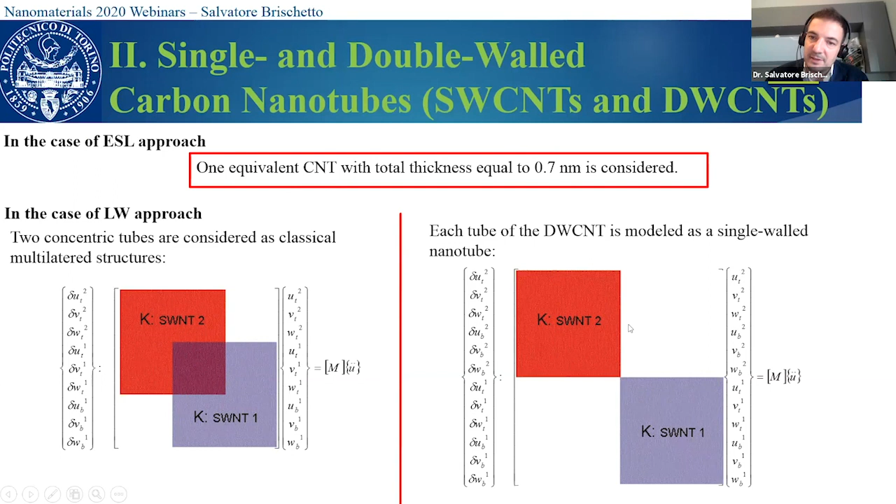In the case of a layer-wise approach, we cannot consider this type of assembling because they are not multilayered structures with interlaminar continuity conditions, but they are separated. If they are separated, the two nanotubes are not linked between them. We must introduce the van der Waals forces in order to collect the rigidity of the two single-walled carbon nanotubes. So the idea is to include the van der Waals forces in the layer-wise approach.

This is the typical equations that we have seen, and these equations give these two forces, which means we add to our assembling these terms. So in this way, the red block and the blue block are connected between them.

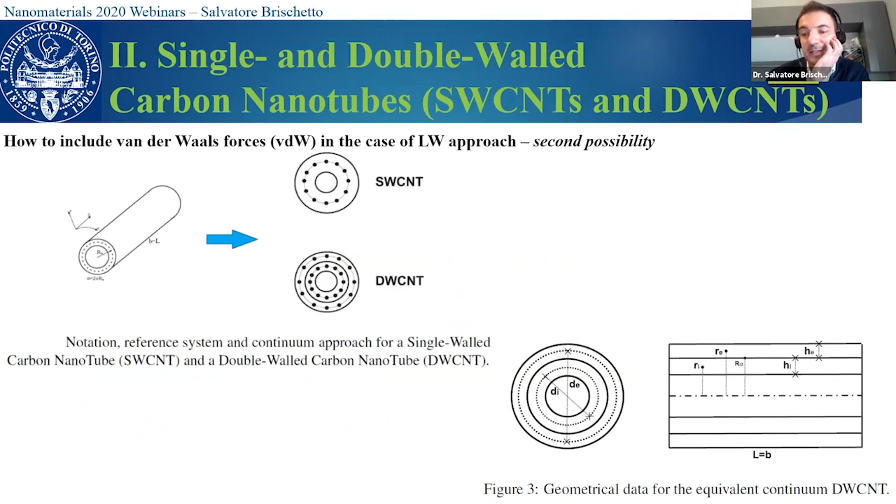Another possibility is to introduce a fictitious layer, a very thin fictitious layer, which represents the van der Waals interactions. So the two nanotubes are separated, very, very close to each other, and they are separated with this fictitious layer which represents the van der Waals interactions. In order to calculate the elastic properties of this fictitious layer, we start from the van der Waals interaction coefficient, and then we arrive at opportune values of Young modulus to give to this layer.

Another block is the third block, about the nano-reinforcement of composite plates and shells. There are several possibilities; we can see some of them. For example, carbon nanotubes embedded in thermoplastic and elastomeric polymers.

In the case of curved carbon nanotubes, we improve the elastic properties. For example, for a volume fraction equal to 3%, we have the comparison between single-walled carbon nanotubes which are rectilinear and those which have an opportune curvature. The first one is rectilinear, the other ones are single-walled or double-walled with curvature.

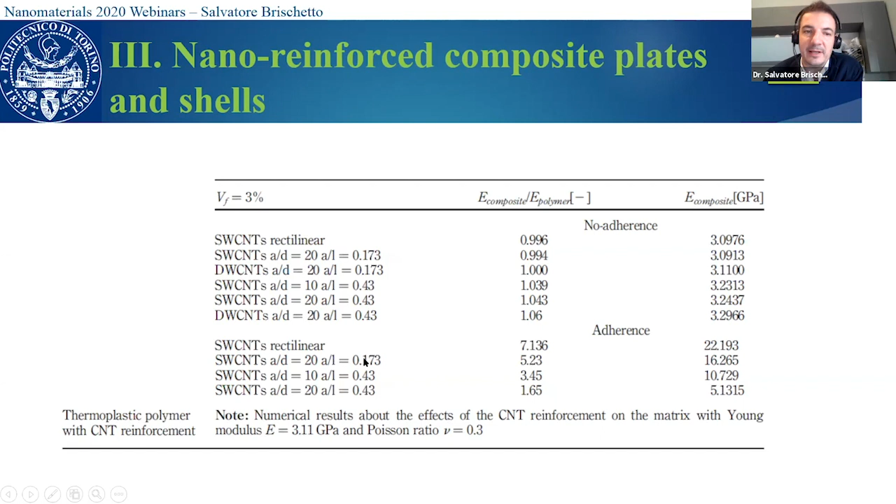We can see that if there is no adherence between the carbon nanotubes and the matrix, the properties do not improve with respect to the original polymer. We need the adherence. And we can see the difference between a rectilinear carbon nanotube and the other types.

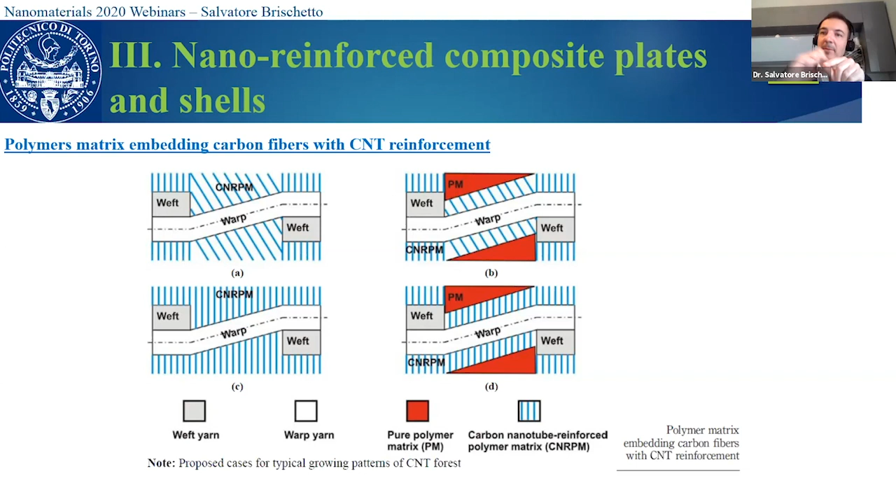These nanotubes added to the single fiber allow us to improve the adherence between the matrix and the fiber. For example, these are the four cases explained in the figure, and this is the example of the multi-layered composite structure without carbon nanotubes. When we add the carbon nanotubes in each single fiber, we improve in particular the transverse normal Young modulus.

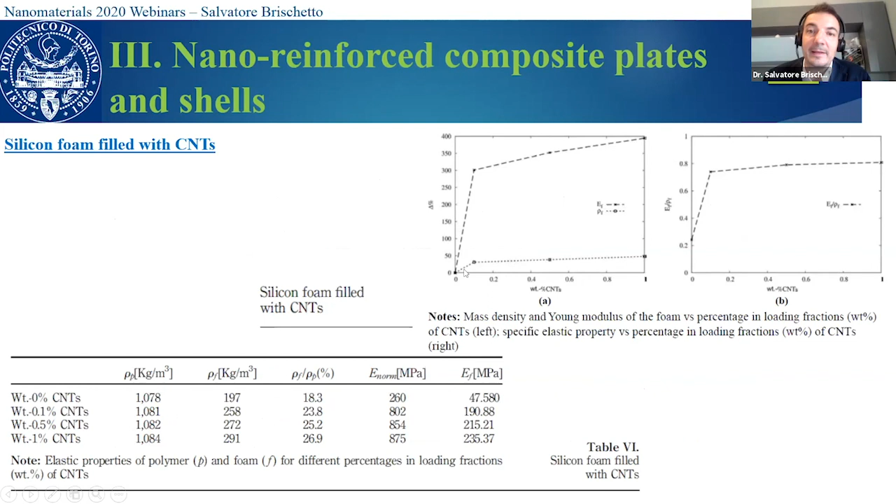Another possibility is the silicon foam. We have sandwich structures with a silicon foam core, and this silicon foam core can be reinforced by means of carbon nanotubes. But in this case, we can see that when we add a different percentage weight of carbon nanotubes, the mass density increases very slowly, while the Young modulus has a very big increment.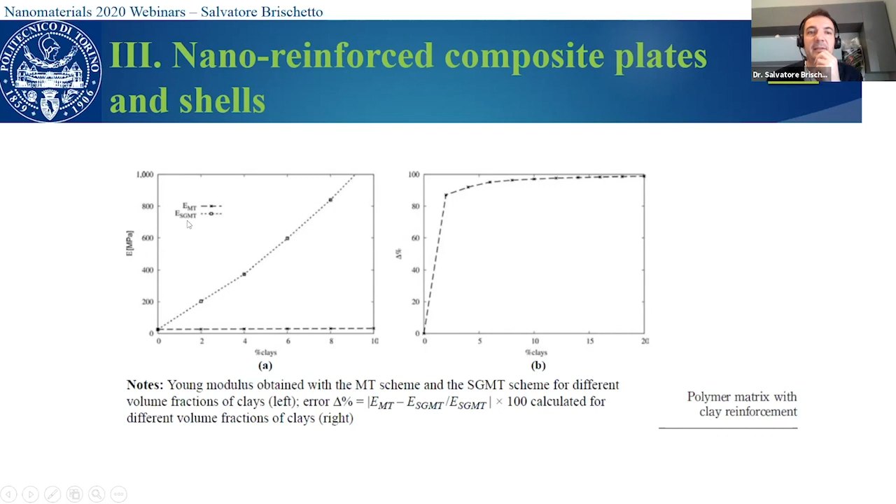This is the Young modulus obtained by means of the Mori-Tanaka scheme, and this is obtained by means of the strain gradient Mori-Tanaka scheme.

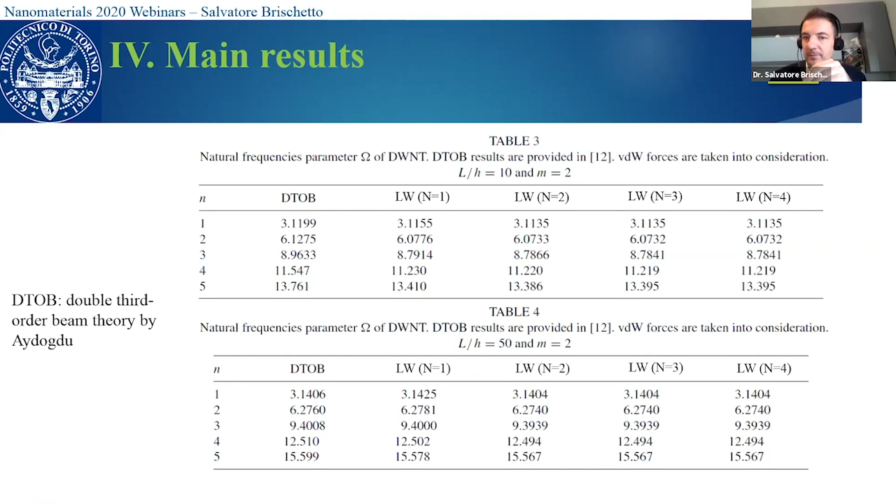Another possibility is to include the layer-wise approach, so in this case we have the van der Waals forces, and the results are completely different with respect to the equivalent single-layer approach. We can see the difference between the equivalent single-layer approach and the layer-wise approach with the van der Waals interactions. The differences increase when the order of frequencies increases, and it's bigger for short carbon nanotubes.

Other results are obtained with the traditional model, and this is important because with beam models we can have results for moderately long and long carbon nanotubes, but when the carbon nanotubes are very short, we need a three-dimensional shell model.

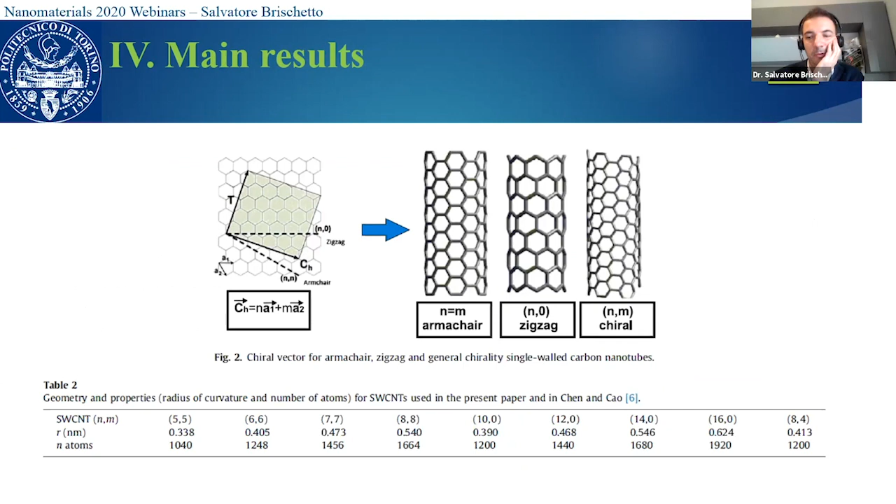So we have performed several results about several chiral vectors, for armchair, zigzag, and chiral nanotubes. These are not so important, but we can see the different properties in terms of frequencies depending on the chiral vector and depending on the type of carbon nanotube, the first, second, third mode, and so on.

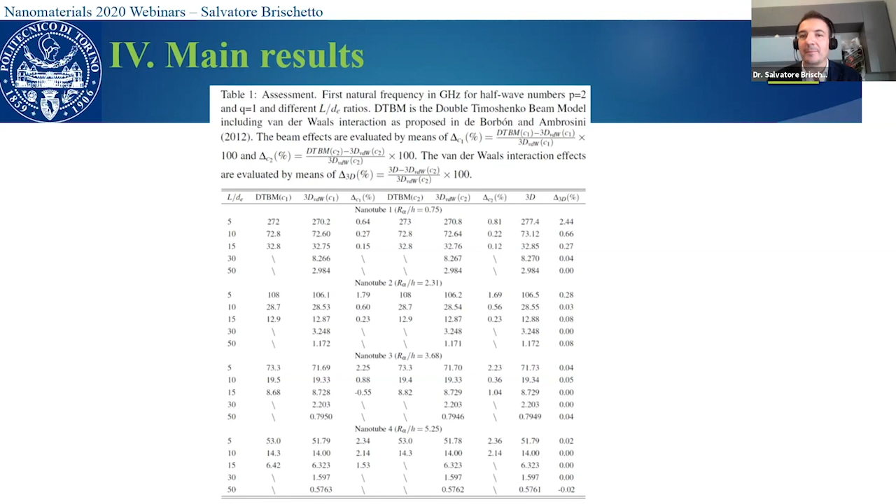Another important consideration is the difference between the three-dimensional model when you include van der Waals interactions, so a layer-wise model with van der Waals interaction, or a layer-wise model without van der Waals interaction, only with interlaminar continuity conditions. This is a very big difference, because for short carbon nanotubes, there's a significant percentage difference between results obtained with a three-dimensional model where the layer-wise approach uses interlaminar continuity, versus the case where the two carbon nanotubes are linked by means of van der Waals interactions. So there's an important difference.

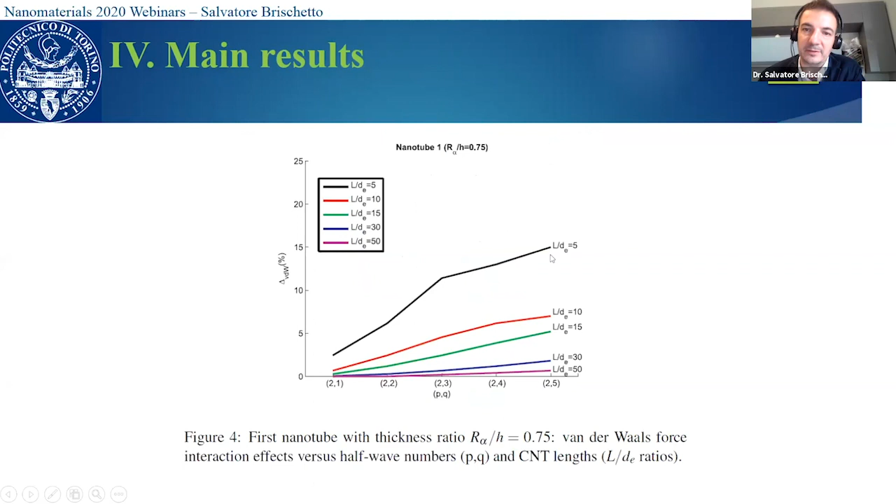Similar results here, so we can go on. We can see the van der Waals effects increase with the order of frequency, and it's more important for short double-walled carbon nanotubes.

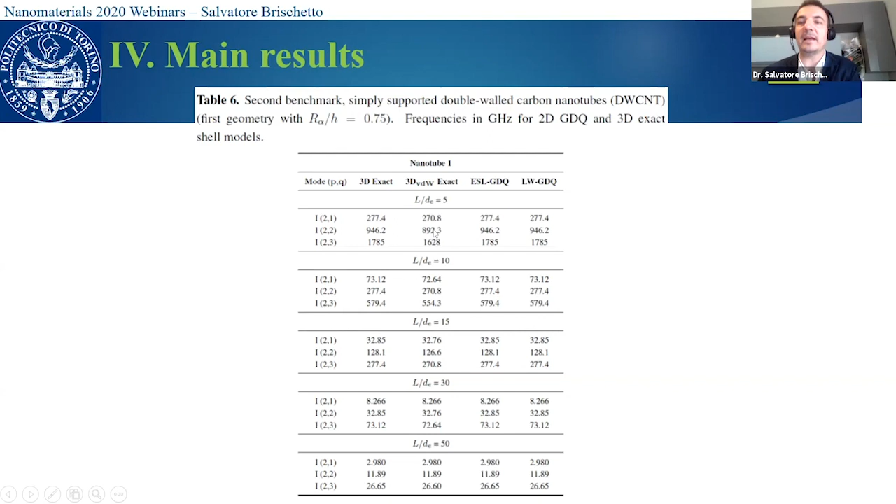Also in this case, we can see the difference between a three-dimensional exact shell model in the layer-wise approach, where the two carbon nanotubes are linked by means of interlaminar continuity conditions, and the case where the two carbon nanotubes are linked by means of van der Waals interaction forces. So these are all these typical results.

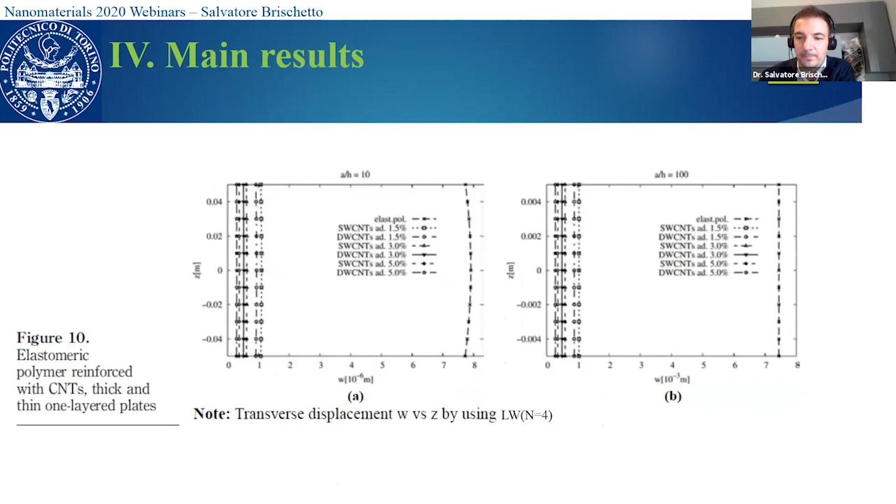Then we can see some results about reinforced plates and shells. In this case, it is very important to use higher order models, for example a layer-wise approach, because when the plate is thick, with a sandwich configuration having high transverse anisotropy, the classical lamination theory and the first order shear deformation theory do not work. For example, if we want to obtain the correct value for the transverse normal stress, we need a higher order model; we cannot use classical lamination theory or first order shear deformation theory. This is a typical example found here: the typical zigzag form of transverse normal displacement in the case of a sandwich structure. This behavior can be obtained only by means of a layer-wise refined model.

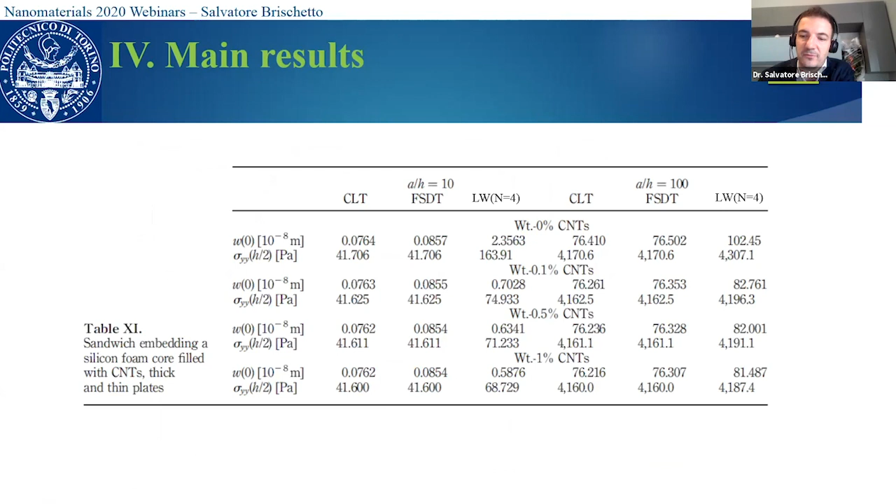In these images, you also find the effects of carbon nanotubes. When you add a percentage weight of carbon nanotubes, the structure becomes more rigid and we obtain smaller values for transverse normal displacement.

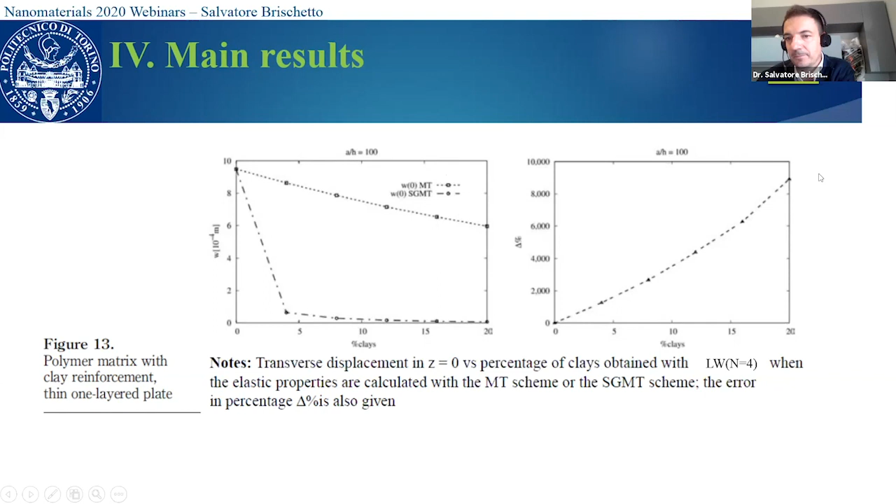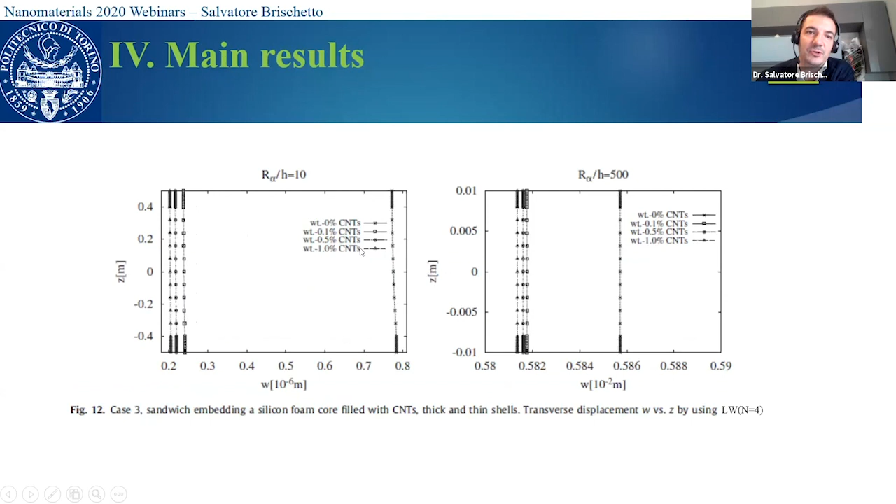So these are other similar results comparing refined models with classical models. In this case, another important consideration can be found here, so we can conclude since the time is nearly finished. So the last important thing can be seen here: the effect in terms of transverse displacement when the percentage of carbon nanotube increases. These are typical results, and here we can see this important aspect.

If instead we use the transverse displacement obtained with elastic properties from the Mori-Tanaka scheme, there are larger differences. So, in conclusion, we have seen the importance of defining the correct equivalent elastic properties for carbon nanotubes when they must be analyzed by means of structural elastic models.

We have seen the importance of shell models for the analysis of short carbon nanotubes. We have seen the difference between a layer-wise approach and equivalent single layer approaches in the case of double-walled carbon nanotube analysis, and in this case we also saw the effects of the van der Waals forces. Then we have seen also the importance of correctly evaluating the improvement of elastic properties when nano reinforcements are added in plate and shell structures.

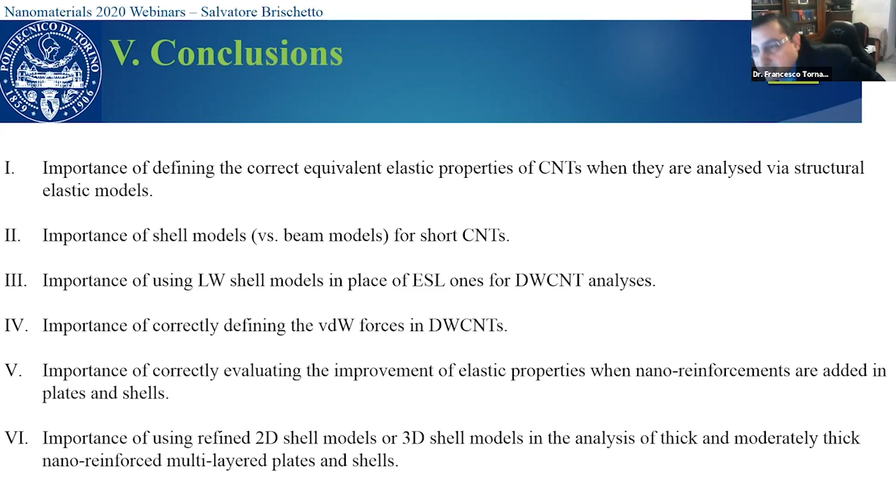Yes, okay, so we have some special cases in nature, and so we can copy from them. And a second question is, with the proposed numerical formulation, are you able to capture nanoscale effects within nanostructures?